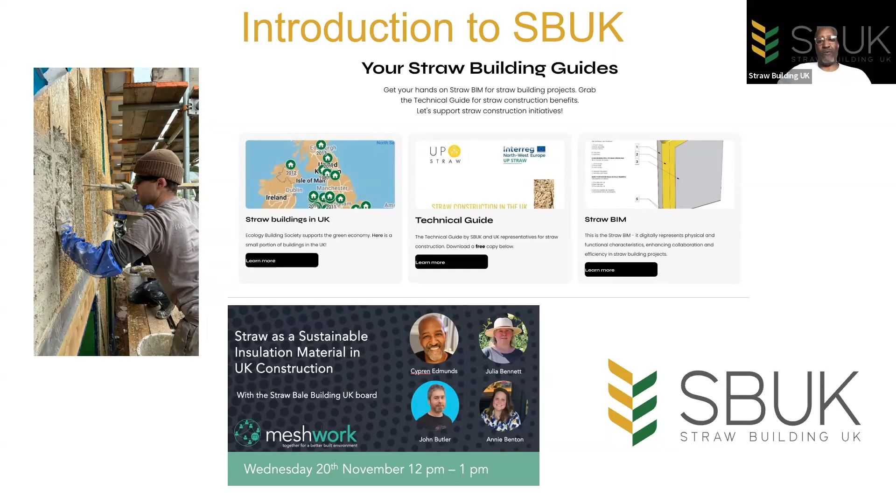Over the past decade we have been working on several aspects and tools that have enabled us to really lead the way when it comes to building with straw. If you go to our website, you can see some of these, available free for you to download, one of which is the Straw EPD - that was one of our previous talks. Also the technical guide and also the Straw BIM.

So, who is Annie Benton? Annie Benton is a Straw Building UK board member. Specifically, she is our treasurer, and she is also a certified passive house designer and technical specification officer for Ecological Building Systems, an organisation based in the UK. They offer natural products in the built environment, from airtight and windtight systems, ventilation and extraction, insulation, and as well as that, they also often offer training courses too.

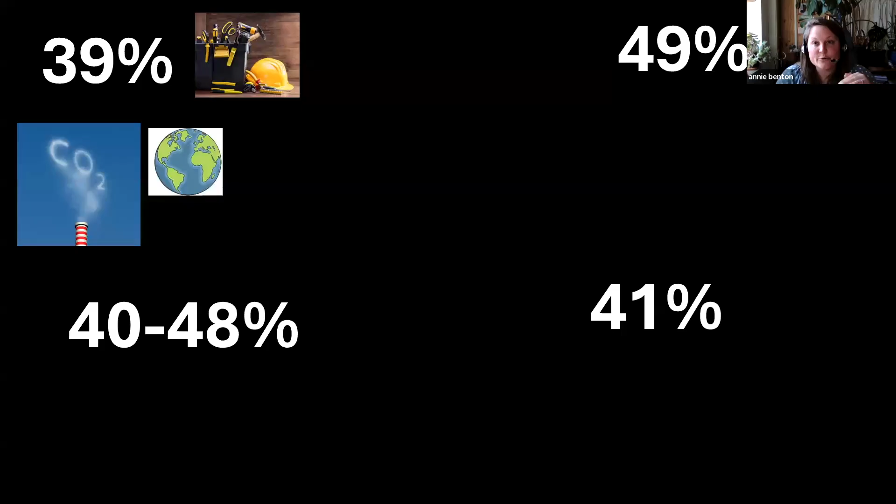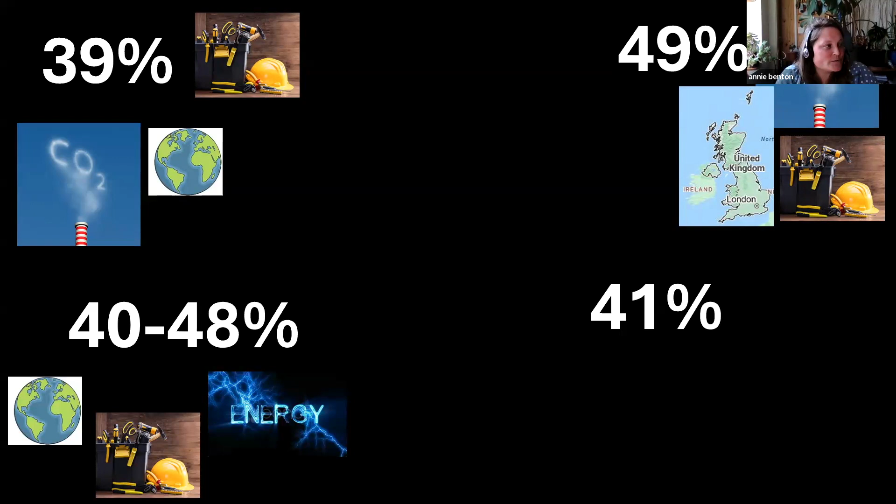That's operational and in construction and in build. In the UK, the construction industry is responsible for about 49% of the UK carbon emissions, which is enormous. On top of carbon, the global construction industry is also responsible for between 40 and 48% of the global energy consumption as well, which is just a profoundly huge figure. And 41% of total end-use energy consumption in the UK was used to heat water and space heating in residential domestic buildings, which is enormous.

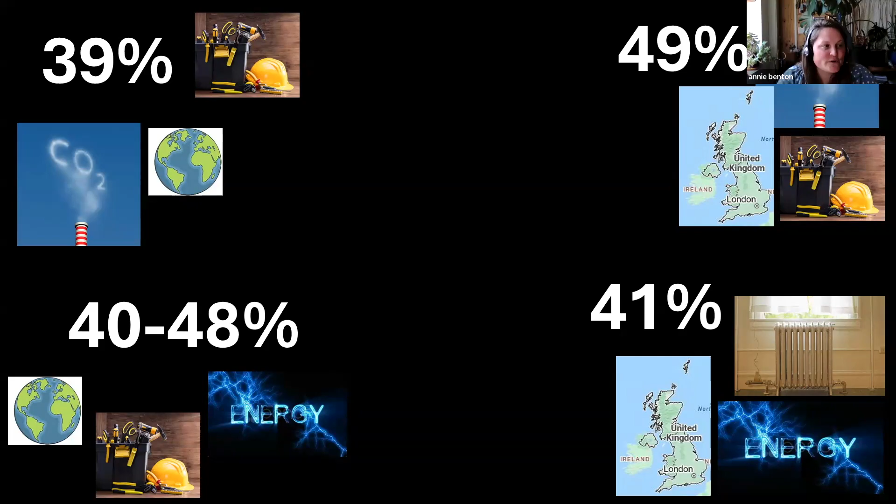They've taken transport out of the initial energy calculation, but still, with the focus here on the need for space heating, which ties into more of my dissertation. Additional data that I dug around and found was that residential buildings in the UK are also responsible for 23% of total end greenhouse gas emissions, with 13% of them associated with space heating, mostly because the buildings that we have are incredibly inefficient. Most of them are graded at a really poor level of EPC, and we have a big job to do.

So you may be familiar with these figures and stats. If anybody wants a copy of my dissertation or they'd like to read it, all the references are in there.

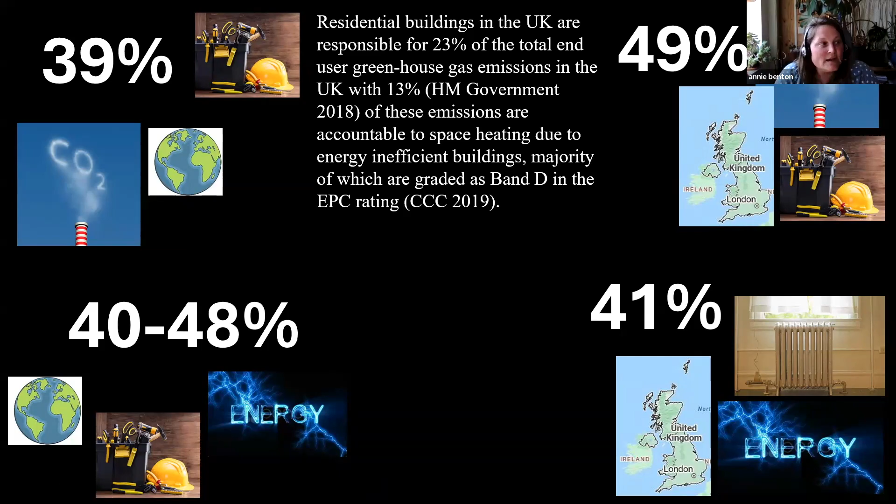So we've got this big issue where the industry is using too much, we're producing too much waste, we're using too many resources. But on top of that, we also have a huge performance gap relevant to design and in-life experience and energy use of a building.

So we are still building buildings that we know will not perform the way that they should, yet we still do it. And for an industry that is very resource heavy and carbon emission heavy, we should be building buildings that we know are going to perform.

So this is sort of where the dissertation came from. The IPCC release reports - the Intergovernmental Panel on Climate Change. They release reports, and the one they released in '23 restated the involvement of human activities causing the global warming of the Earth.

We can see that there's huge impacts everywhere, from extreme weather patterns, global food and water scarcity, disease, mass migration. We're going to see more of these impacts locally to us now in communities, including things like more overheating in buildings and that sort of thing.

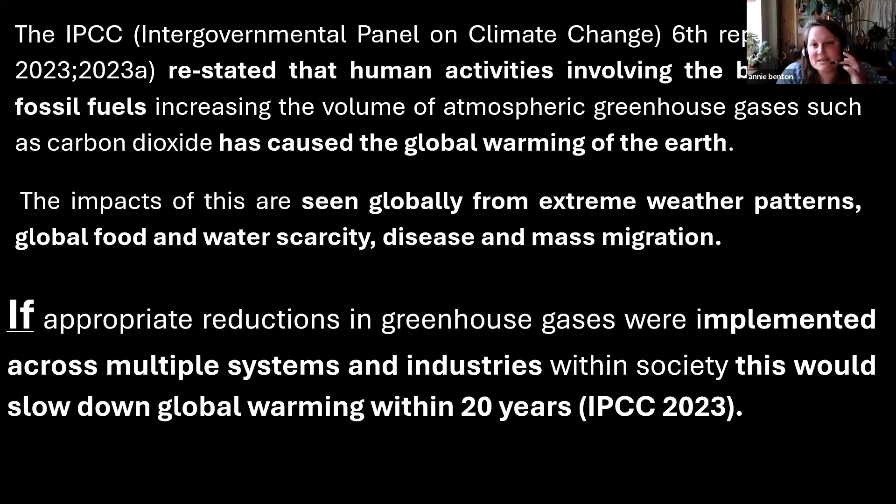So we're all massively impacted by it. But the report also highlighted that if appropriate reductions were made across multiple systems and industries, actually we could slow it down within 20 years.

And construction was mentioned in there as an industry. So what are we doing? Are we acting quick enough? In my opinion, no, we're not. But the fact that there are strategies and things out there that we could be doing, I think is really positive, and I think as an industry we need to wake up and get on with it.

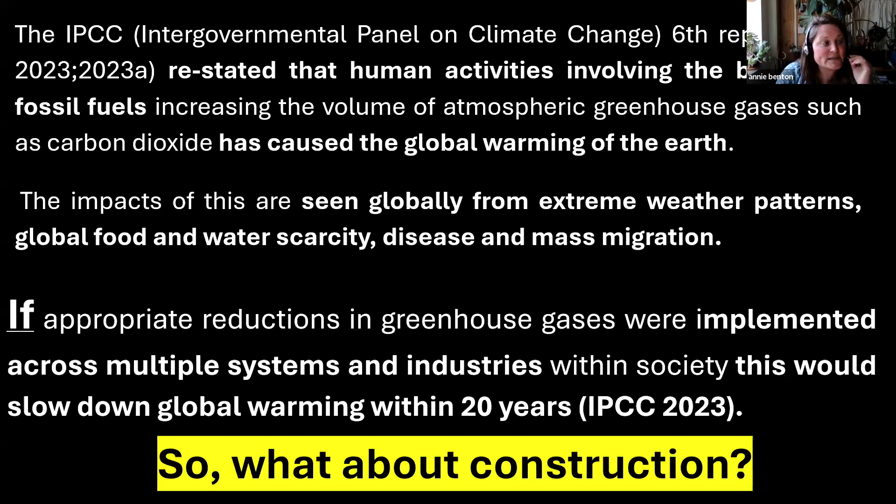We have a lot of the solutions already. So what I'm going to chat to you today is about my dissertation in terms of what I did and the data collected about our EcoCocon family home.

But I'm going to give you a little bit of context first. So this is my actual parents' home as a self-build. I came in later when sadly my dad got diagnosed with cancer and we rallied the troops. So it was their story to tell and their journey to tell, but because he's not here, I'm going to tell it as best I can.

So in the beginning, my parents effectively bought some land here in Suffolk with planning permission for a building that was not a sensible building, not energy efficient, facing the wrong way, not insulated properly, etc. So they re-put the planning in and it got granted for a sustainable home.

And they spent a lot of time trying to work out what materials to use. And my dad was a real energy fanatic, passionate about the climate, passionate about the environment, passionate about the physics principles on how a building performs.

And he worked at the Norwich University and he ran the facilities there and he did the energy management. So he wanted to use a material that had low embodied carbon and low embodied energy from an ethical company.

And he found EcoCocon at Future Build, or Eco Build at the time, in 2016. They then had the opportunity to go out to EcoCocon in Lithuania as a customer of Strawworks, which was an organisation then that was managing design and build of straw projects. And they went out with the license holders of all the countries and had a 3-day training.

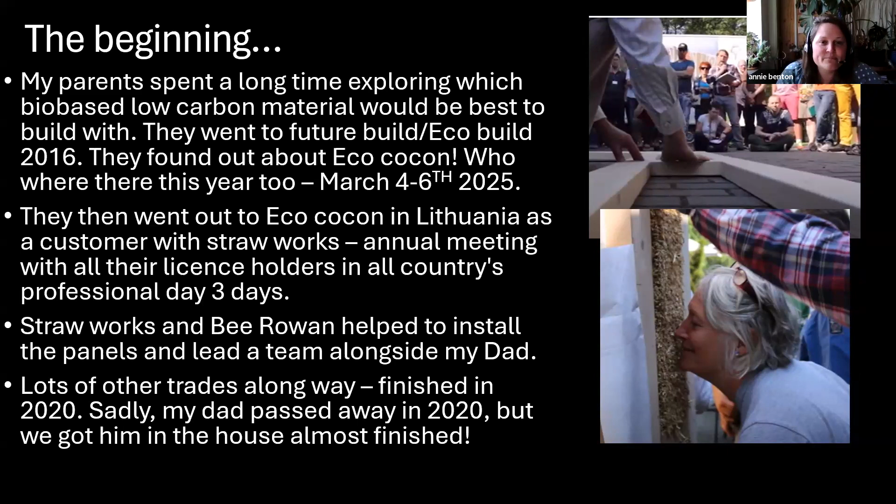Sadly, Dad passed away in 2020, but we did get him in the house almost finished, and he was really impressed by what we'd managed to rally. So that's really nice. That's just him having a beer in the sun because it's sunny today. So why not?

A little bit of background about EcoCocon. We've got George on the call today, so if you have any more technical questions, drop them in the chat and he'll help answer them. It's a compressed straw panel, multi-directional compression straw panel. It's effectively straw in a box, and it has a breather membrane around the outside, and it has wood fibre. You can have internal finishes - clay is primarily the internal finish, and the external can be ventilated facade or rendered.

It's a flat 400 wide panel, Passive House certified, REI 120 fire rated, and I think they've achieved their silver for cradle to cradle, which is amazing.

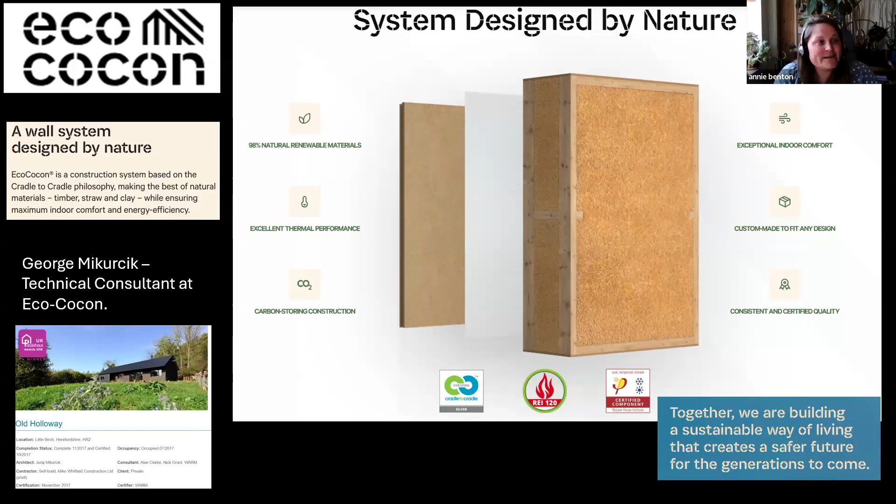A shout out to George's house - he also built an EcoCocon house called Old Holloway. You may well have heard of it. It's on the Passive House Trust website, Passive House certified. Again, a fabulous project demonstrating exactly what we should be building with.

If you go onto EcoCocon's website, there's tons of technical information that's really helpful, and general advice. It's a very good website. I've taken a screenshot from their brochure to show the build up of the wall - you can see the ventilated cladding or render, the clay plaster, etc. Their website is full of information, and it has all the WUFI calculations. Just go and have a look.

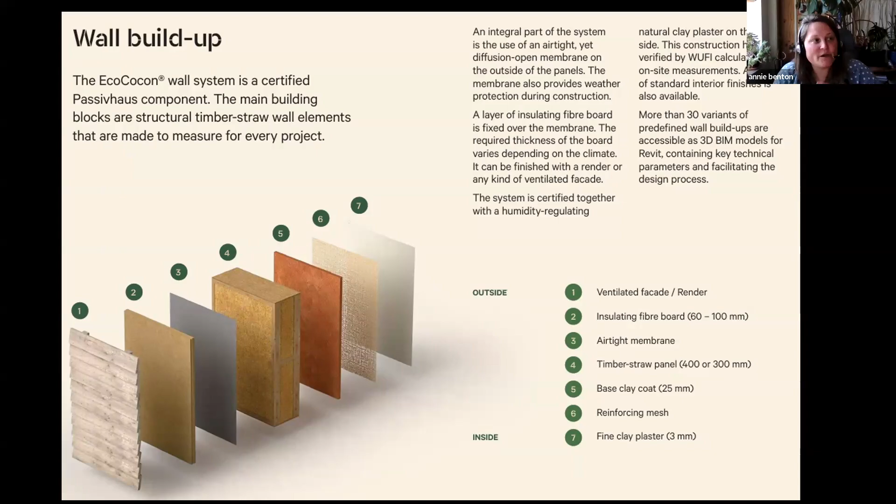I did add in about fire because from working with SBUK, I often get asked by architects and others when they visit our house whether there's a risk of fire. So go and read the fire reports EcoCocon have done - they have an REI of 120. There's a huge report, go have a look. It's not a concern to us - I'm just putting that out there.

When we went to EcoCocon for the design, you create this panel project of what you want, and we designed it in house with them. All the panels are load bearing, and at the point when my parents had the design done, they were also doing the roof elements - I think that's changed now, but originally it was part of it. You can see the panels individually, the lintels around doors and windows, and they have additional timber for structural rigidity.

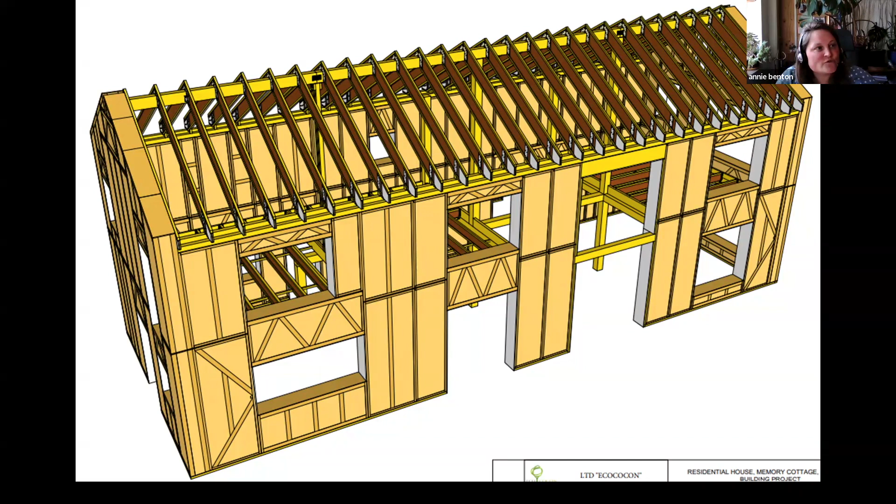We started the build in 2016-17. This is the slab - a highly insulated slab. My parents, my dad particularly, didn't want to use concrete, but when it came down to choices, costs and where you're going to put it, he did put some in the ground. So we have a highly insulated slab with a screed on top.

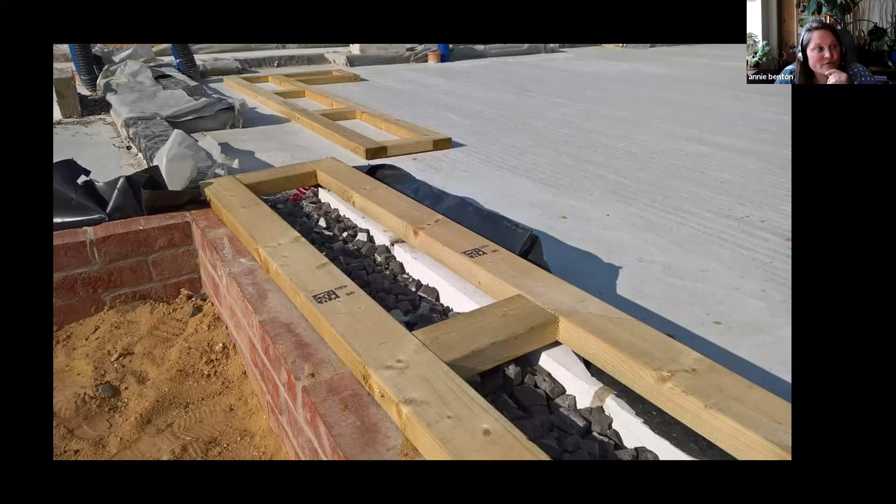The actual walls the panels sit on are an insulated, thermally broken cavity wall - 400 wide, filled with glapor foam glass aggregate in the middle. The internal leaf brick is a thermal block, and the internal face of the external leaf is also thermally broken, so you've really stopped the thermal bridge through the brick plinth, which is problematic on buildings. I've put my thermal imaging camera around the building and we don't have any bridges there, so I think he did do well.

We had an external groundwork company come in and pour the initial screed over the insulation, but my dad put all the stud work, little ladders for the panels, and he was out there the day before the panels arrived making sure everything was completely level, which it was - the groundworks team did a really good job.

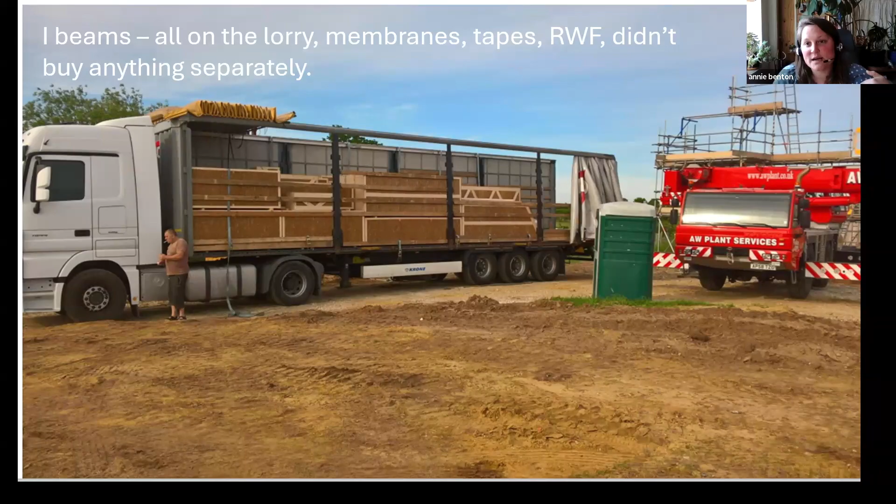All the panels arrived on 2 lorries from Lithuania - we had all the membranes, tapes, the rigid wood fibre, the clay, and the roof I-beams. They all arrived stacked like Tetris, coming off in the right order as to what was needed on site. Very organised. Some pictures of just the beauty of them - they're possibly one of the most beautiful building products I've seen and get to be around.

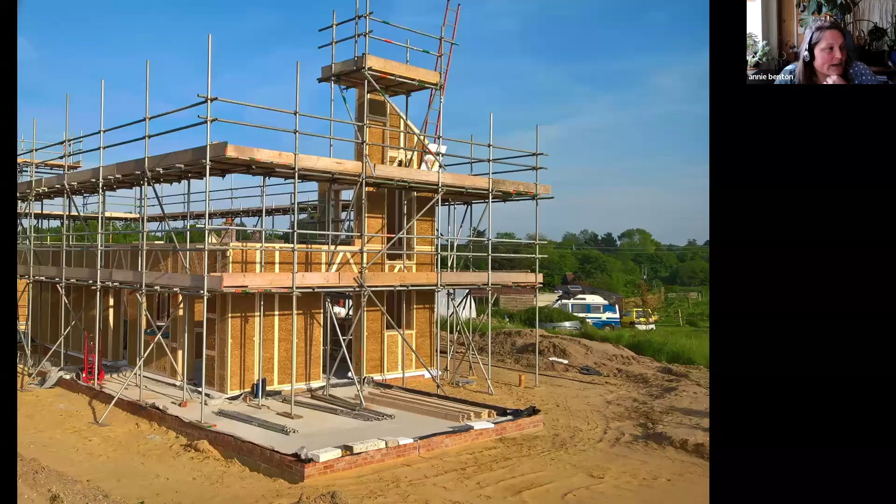This is the west gable end. The whole lot took about 2 days to unload and 2 days to go up with about 5 guys. But I will stress, they did know what they were doing with EcoCocon, so it would take longer if you didn't. The technical guidance and advice for construction is exemplary, and it isn't rocket science - it's following the instructions, following the order, and making sure you fix things properly.

So just more of the panels, just because it's a shame that they're covered up now. We had a couple of things in this picture. You can see the black plastic that doesn't stay there - that was purely put up for construction protection, just in case of rain. This was put up in the summer, but we do have rain in August occasionally, less so now as it's becoming much hotter. So as it was going up, they were just getting those battens and the black plastic on to ensure it was safe.

The actual timber in the middle that you can see, the oak frame, isn't necessary at all - the panels are load bearing. My dad wanted to put it in as a feature, so fair play to the man. That's what he wanted to do, and the roof calculation was then done with that in mind. But as I said, it's not necessary.

So now you can see there's something on the roof covering - it's just an external wood fibre board that goes over the top of the rafters. The I-joists in the roof were filled with Warmcel cellulose insulation, and there's a membrane, then a wood fibre board and a clay internal finish. As you can see, we've got some windows in - maybe, oh no, it's just the membrane over the windows, no windows yet.

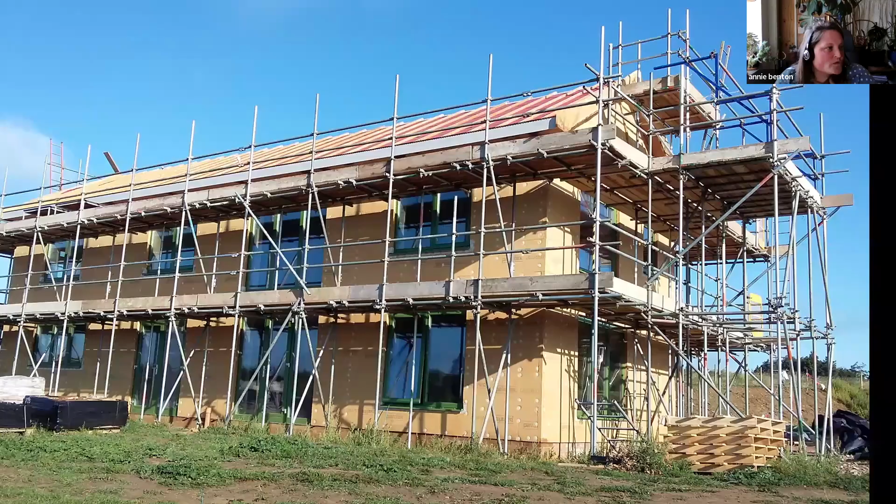So you can see then the 60mm rigid wood fibre board's gone on. They've had the waterproof taping around the windows, and all those thermally broken fixings as well - just assuming that there's no... trying to stop the thermal bridging, which is good.

So, services - I am in no way a services engineer, so I'm just going to take you through briefly what's happening in the building. It was designed with PHPP as a passive house. We didn't get it certified, which just wasn't the motivation of my dad. I'm kind of torn with that - I wish he had, because I think the more buildings we have built with sensible materials that prove they work, the more powerful they are. Sadly, I think in our industry, biobased materials have to fight 50% harder than mainstream materials, even though mainstream buildings don't perform. So I'm on a double-edged sword - I understand the reasoning, but I kind of wish that another one would just be brilliant.

So it has MVHR, which is great. We have a Zehnder ComfoAir Q unit, which is brilliant. I change the filters up there every 6 months or so - you can really see the dirt and grime that comes out of those filters. We do live in a rural area, there are farms around us, so there would be a lot of particulates. But you can really see it.

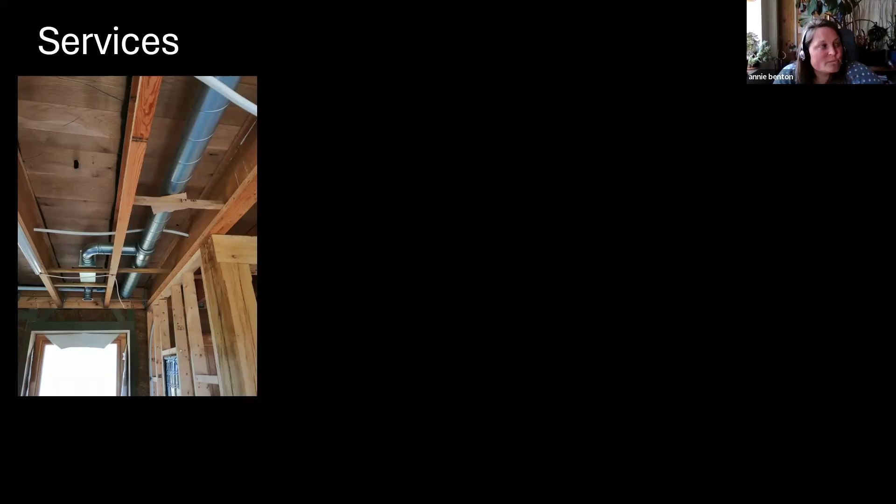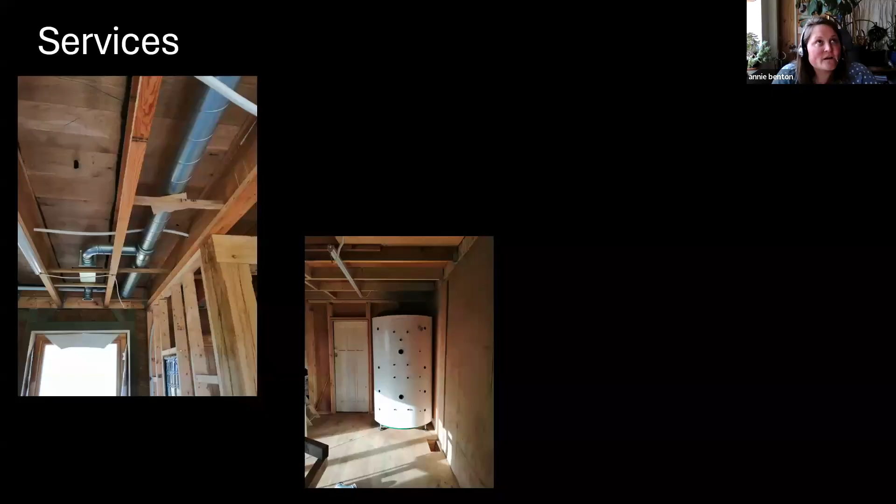We have a thermal heat store we call the Dalek, that's slightly oversized, but it was one of the ones available and my dad needed to get it into the building. So we have hot water generated from the sun - we have solar thermal, and hot water generated from a gasification back-boiling stove, which I'll show you in a minute. So there are a couple of times in the year where it would be really good to have a wind turbine to generate hot water. We end up putting the fire on even when we don't need the heat in the building, but it's a very efficient stove, so it lets out minimal heat. It's very clever in what it does.

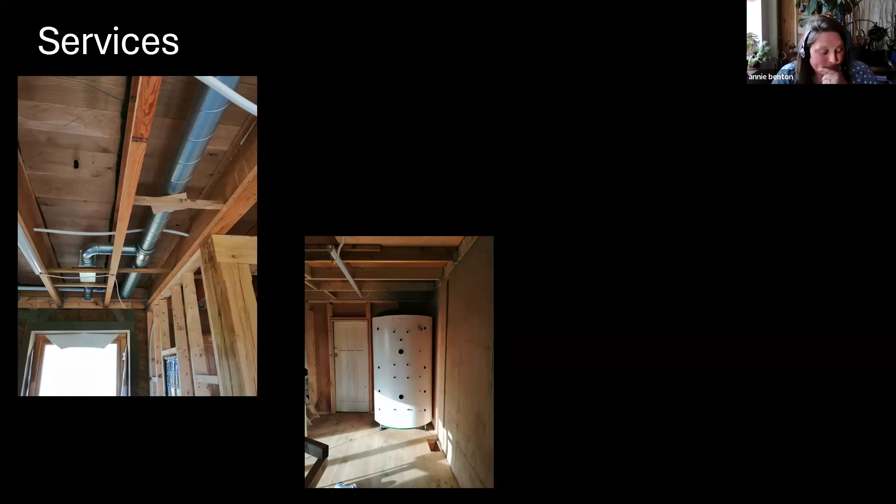We do have an underfloor heating system, purely because it was put in as it can't be retrofitted later. My parents figured that if it did get to -30, then we'd need some heating, so we better put something in. We occasionally use it, very occasionally.

We're glad it's there, it's a good thing. And this is our amazing piece of kit - this is a Walltherm, and it is just the most amazing piece of kit.

So it's a fire with a back boiler on the back. It moves the water - cold water comes in, it heats the water, and the water goes up and gets stored in the heat store. But what's so clever is it burns so efficiently. It takes about 8 to 10 logs to heat the 1,000 litres up in the heat store.

So when you put the logs in and it gets to a certain temperature, you flick up a lever, and all the gases that were waste, that were going up the flue, get pushed down and reburnt, so we're using the energy from those waste gases. So what comes out is really minimal waste and really minimal particulates.

So it's absolutely brilliant. It doesn't let out a huge amount of wattage into the room, which is a good thing, because the house is so airtight and insulated anyway that you would probably overheat. But some of our pipes maybe aren't as insulated as they should be, because it was a self-build, and now knowing what I know, maybe I'd go back and redo those.

So there is a little bit of dissipated heat from the domestic hot water pipes, which we do see in passive houses when it comes to overheating and stuff like that. But it's a fabulous system, and it's just brilliant, very efficient.

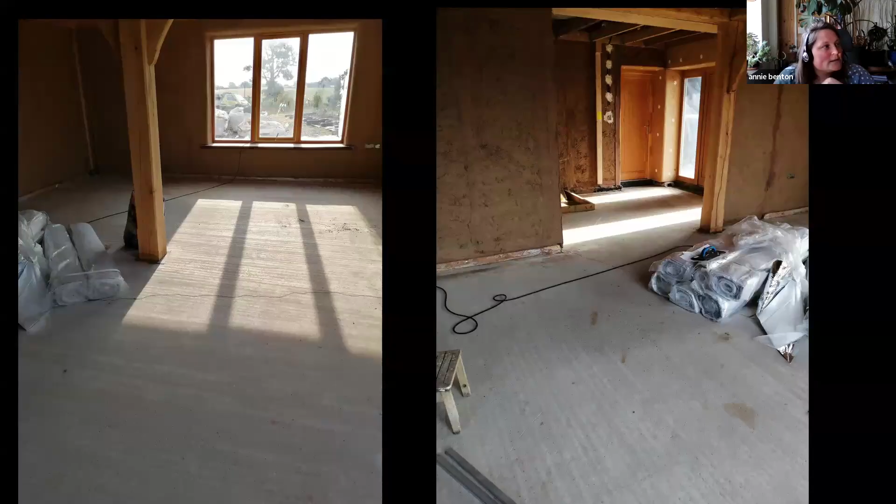So this is just to show you the screed that went down and the clay plaster. You can see the base coat internal clay plaster has gone down, and also there's electric conduits that have been cut through and then plastered behind - you can just see over in the back there with the white splodges.

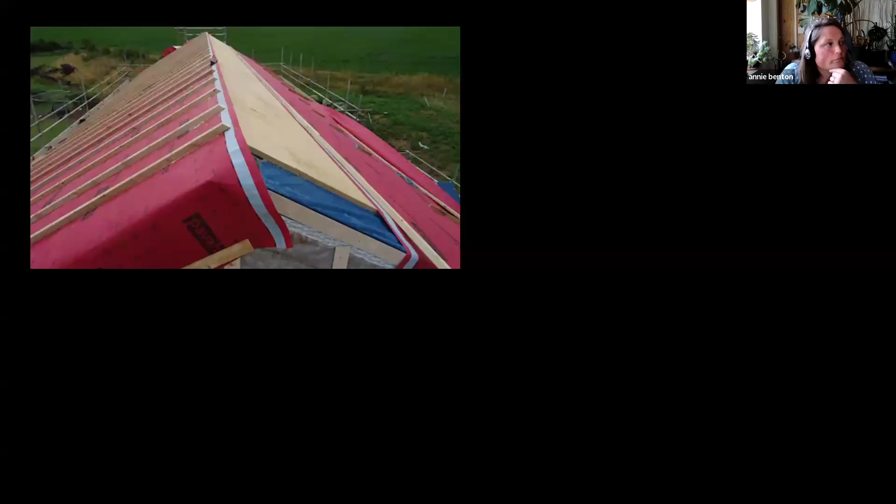Wood fibre board over the roof, sarking board and cedar shingles with batten and counter batten. These have now changed, aged in colour, which looks really pretty. And the external building is also lime rendered.

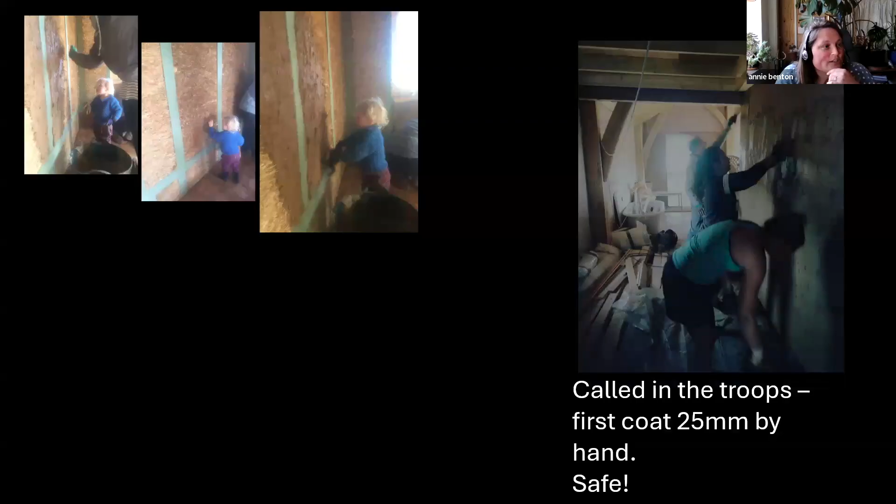So clay plaster, just to give you an idea of the air tightness - it's an absolute joy to use. If you've ever had the opportunity to use it, then excellent. If you haven't, then try and get some. It's just the most amazing material.

It's just so safe, so you can see my niece actually putting on the base coat with her hands - she must have been about 2. We just smush it into the straw, and then for the top coat you'd use more of your trowels and standard plastering tools.

But we rallied in the troops to get this done, because this is when the diagnosis stage happened with my dad, and it was a call-in-the-troops moment. But it was an absolute joy - this is where my interest in clay plastering started from as well, which is nice.

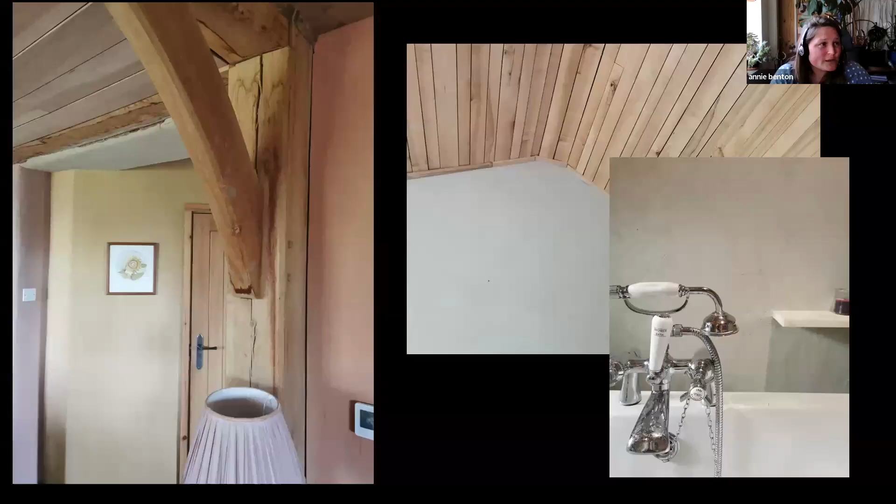So internal colours, just to show you - all the clay came with EcoCocon on the lorries. The branding, I think it's Yuku, the clay plaster. I think there are other ones they've added in terms of colours and textures, but you'll have to check with George about that, because I'm not sure. But I just wanted to show you the colours.

So there's blues, greys, yellows, greens, oranges, reds, pinks, greys, whites, and they're all natural. And you can dilute them with the white to make different shades of colour. It's just fabulous.

And when the sun shines through the building and onto the back of the wall, all the mica in the clay just sparkles. It's just so beautiful. There are other things you can put in there as well, like dried flowers and stuff if you like, but we didn't.

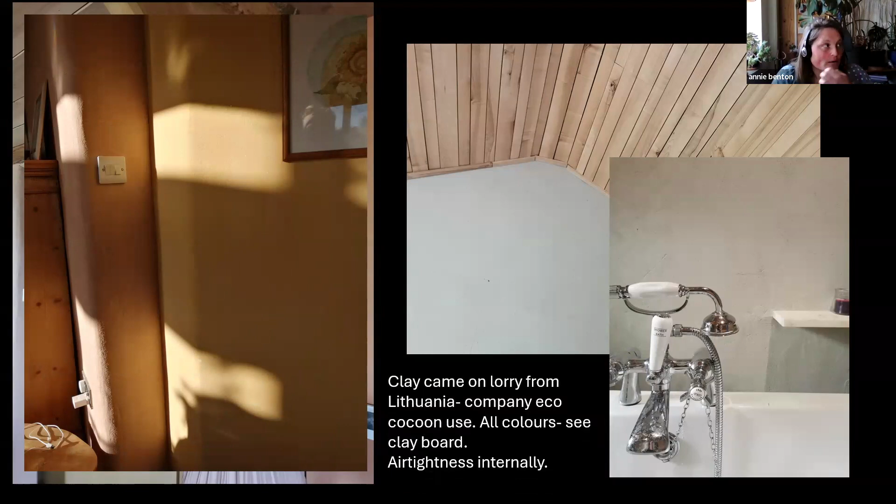But again, it came on the lorry, and it's about 30 mil thick for air tightness. So we achieved 0.7 air changes.

So this is what it looks like. We've got quite a lot of glazing on the south face, and the west end where the conservatory is. The conservatory actually acts as a bit of a buffer zone, which will definitely help the building not become too hot, because we have no shading around us.

We don't overheat. We do have summer bypass in our MVHR, and we do open the windows at night to allow dual aspect night cooling. But also, the amount of mass in the building and the fact that it's airtight means we just close the windows and shut it down.

A couple of years ago it was really hot here, I think we had like 36, 37 degrees. It was about 25 in there, and we had 5 people, 2 dogs and babies for a week and a half, and it just didn't get above that. So thermal mass has a huge part to play.

The floor is concrete, there's pamments on the floor. The clay adds mass, the straw has mass to a certain degree, the wood fibre has mass. So I think that really helps its performance, but it's a very thermally comfortable building.

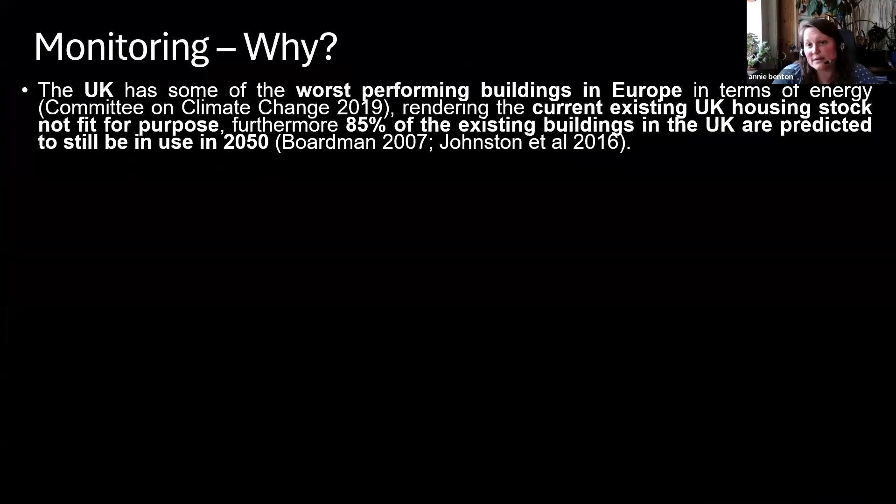So, monitoring - why? You may or may not know that we have some of the worst performing buildings in Europe, and there was a report done that effectively rendered the current existing housing stock not fit for purpose, which means we've got a lot of work on our hands to do with retrofit. But what's more concerning is we're still building buildings that are not performing. So that's maybe more of a moral issue.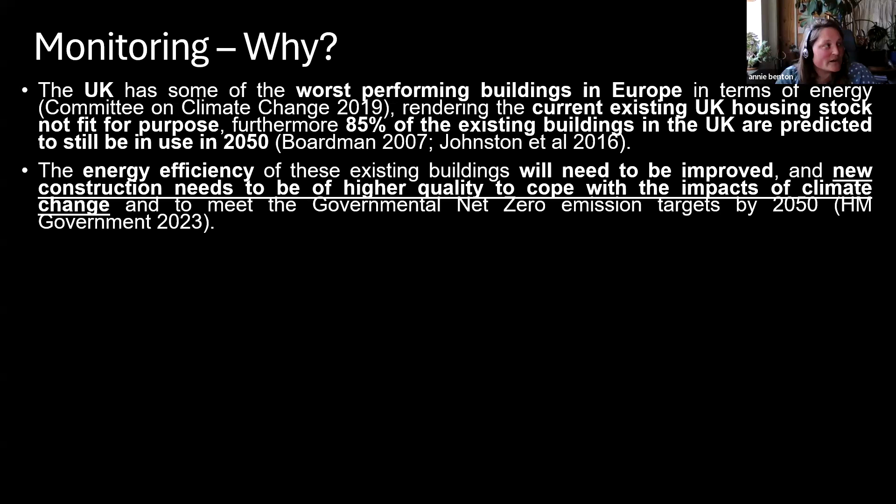We know that the energy efficiency of these buildings will need to be improved to meet the impacts of climate change, to meet targets by 2050. So what we need to do more of is actually more monitoring and evaluating the buildings that are working, and why the buildings that are not working, and then what we can do that is the most cost effective, sensible practice, and what materials we should use, etc.

So using science, modelling and measuring in situ is vital to understand how buildings are performing. But this is not mandatory in the UK. They brought out a British standard in '22 that's aiming to put more evaluation in as mandatory, but it's not. And a lot of the time, as I said at the beginning, there is this performance gap.

There's like a 60% performance gap where buildings are meant to perform to level A and they perform to level D - like 60% worse than they should. So yeah, we need to do more of this measuring. It needs to be made mandatory.

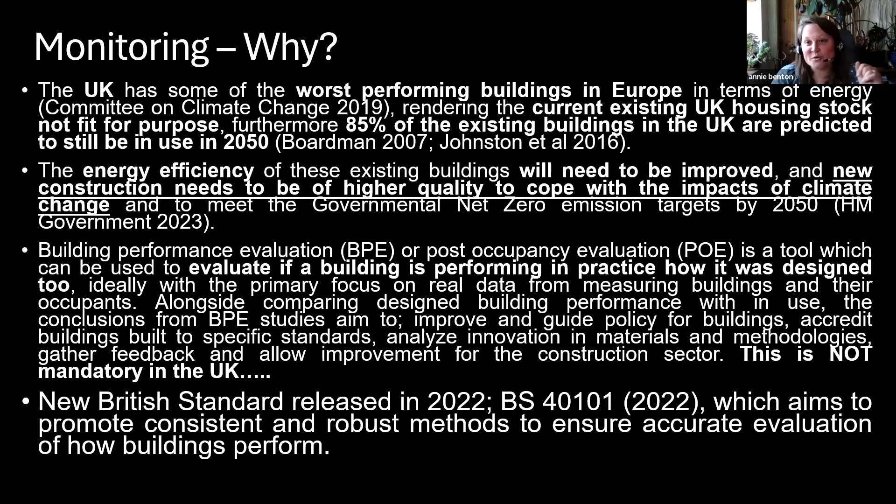So this is what my dissertation focused on, primarily also because I could find very little studies of in situ straw and straw panel houses, and I knew that it worked because we live in it. So it was a case of trying to prove that it worked, which is sort of the motivation behind it.

So when it comes to doing building performance evaluation, there's different metrics you can use. This is a great paper - I think I've put the reference on a couple of slides - to give you an introduction to building performance evaluation if it's something you're interested in.

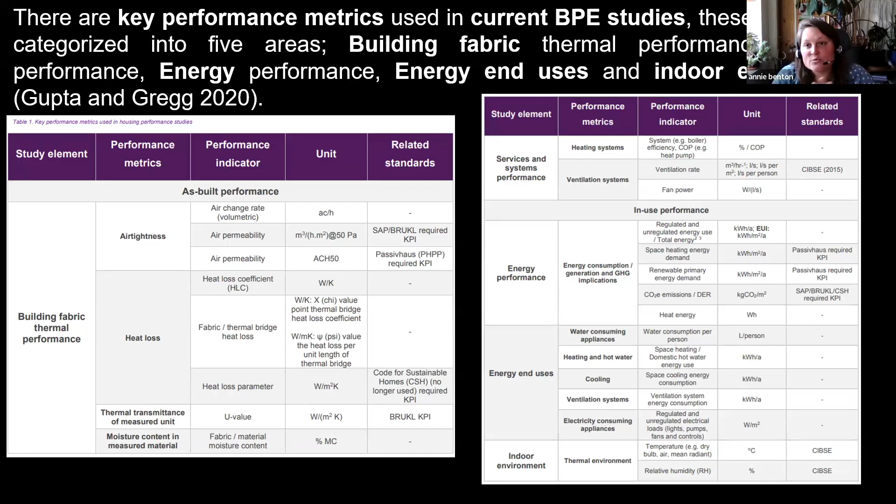So there's building fabric thermal performance - things like air tightness, heat loss, the thermal transmittance which is the U value - and then measuring moisture. There's also services and systems, energy performance, energy end use, and then indoor environments. There's all different categories you can investigate when it comes to doing building performance evaluation.

I chose these two, the U value and the indoor environment, primarily because I managed to get hold of some equipment for free, which was great. So I contacted the Cambridge Architectural Research - I'm based in Suffolk - and I went to meet Jason Palmer, who's done some work for BEIS doing lots of U value measuring. I said to him, I want to measure a straw house, will you help me? And so he gave me the kit to use, which was just the most amazing thing.

He showed me briefly how to use it, and helped slightly with the error analysis and that sort of thing to help make sure I knew what I was doing, because I'm a complete novice in this - I've never done any BPE before. I also need to shout out my supervisor, John Butler, who was epic, as we all know if you know him. He was so helpful in understanding the British standards.

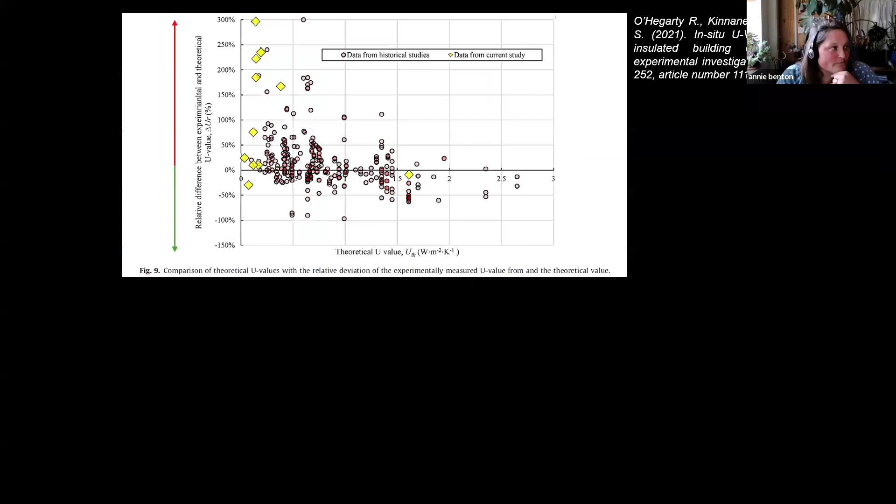So these guys lent me the kit, so I was like, right, well, I'll measure U values. And one of my reasons to do this was because lots of papers show how over-insulated buildings actually underperform.

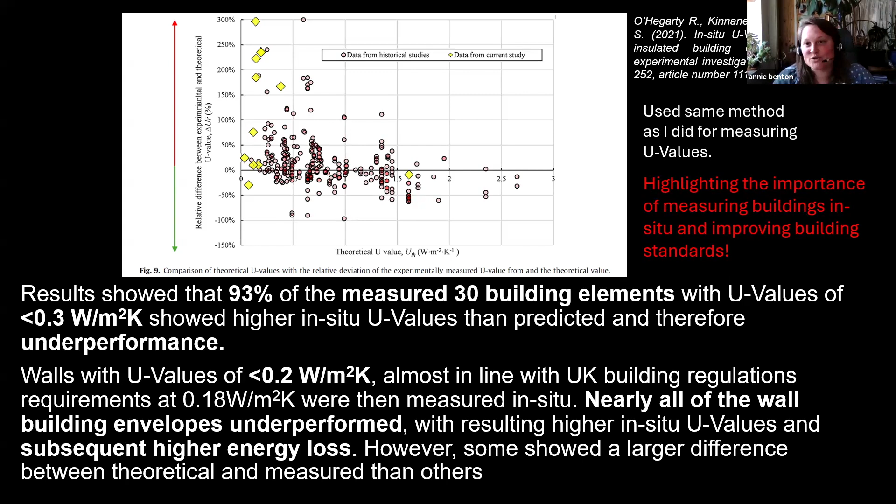This paper is a bit controversial because no science is perfect, and statistical analysis can vary. But this paper used the same method as me, measuring lots of highly insulated buildings, and found that 93% or more underperformed compared to what they were meant to with their U value. So the U value was higher than it should be, which brings up further questions we'll get to later. I put this in because it highlights the importance of measuring actual in-situ performance, improving understanding of how these buildings actually work, to try and improve building standards and policy.

These are some of the literature you might want to look at if you're interested in this. Gupta and Gregg is a really good review, and Fionn Stevenson's book is also excellent. And then, as I said, there's the new standard.

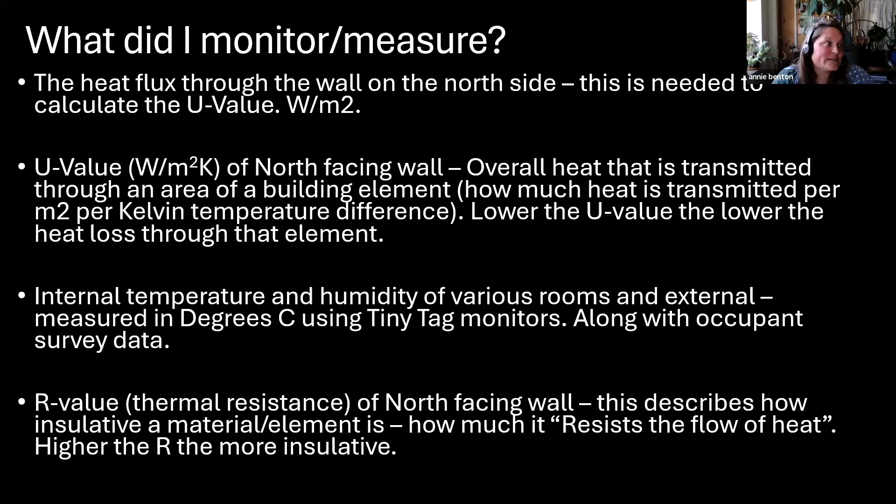So what did I monitor and measure? I measured the heat flux through the wall on the north side using the kit I'd borrowed. That allowed me to calculate the U value of the wall, the overall heat transmitted through an area of the building per temperature difference in Kelvin on each side. I also measured internal temperatures and humidities of various rooms and outside. And because I'd collected the heat flux and temperature data, I could also work out the R value of the straw panels.

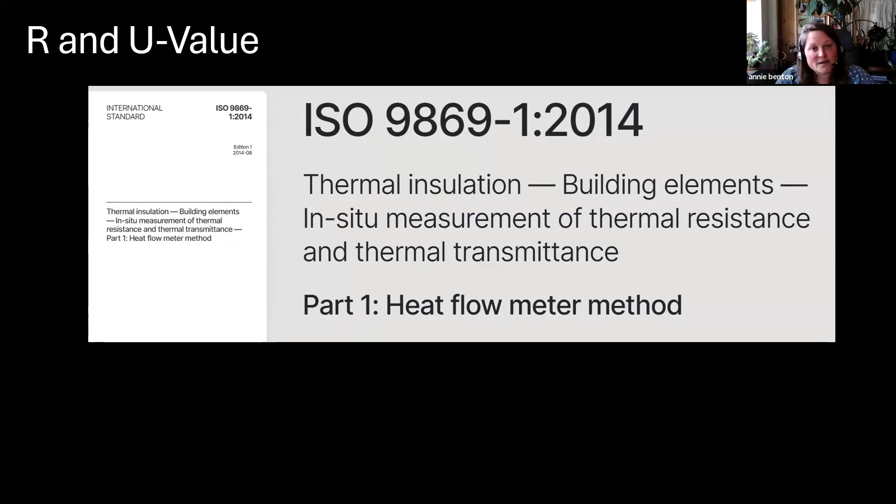This is the British standard I used, ISO 9869, the heat flow meter method. A couple of reasons why I used this: I could get hold of the equipment, but the motivation was because it's the most widely internationally recognized non-invasive method. It is far from perfect, and there are a few other methods you can use.

Now we have things like the pulse test, and other things that Build Test Solutions also do. But in terms of British standards, this is the go-to one. So I thought, if I'm going to do this accurately and get the data correct, I want it to be comparable to as many things as possible. So let's try and do the most popular method, which is also why I used it.

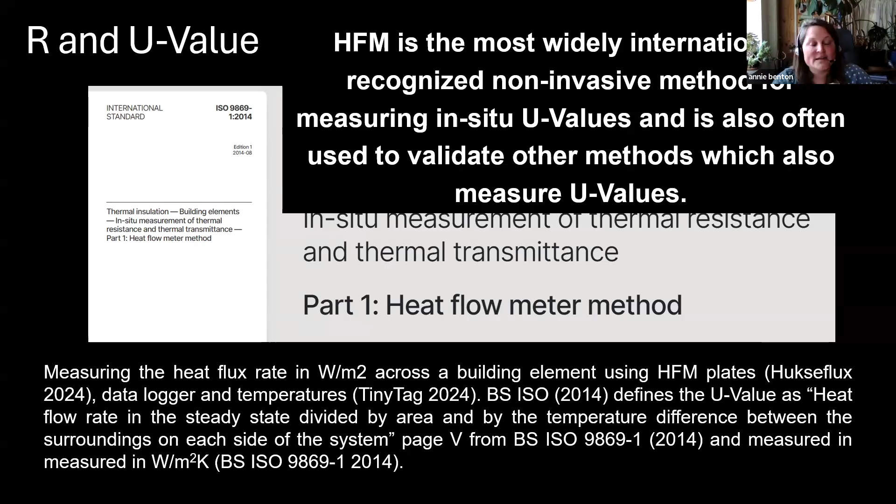It basically measures the heat flux across a building element using heat flux plates—Hukseflux, if you've heard of them—plus data loggers and surface temperatures. I'll show you a picture in a minute.

I installed equipment on the internal face of the north wall to avoid any solar gain, and the data logger collected that heat flux data for 25 days over January 2024. This was to reduce the risk of small temperature difference. The British Standard recommends a minimum temperature difference of 10 degrees from inside to out, and highly insulated buildings should be a bit higher than that. Typically you'd do this over 7 days.

To make the data more accurate, I did it over 3 weeks, thinking that over a longer period the averages would be more accurate because I've got more data collected. That was one way to try and reduce error. I did actually get the temperature difference needed anyway, which made the results much more robust.

I stuck those red pads on the walls with tape. They've got a plastic square around them, and you fix the plastic to the wall. This is what they did in the Baker paper that Jason Palmer from Cambridge had used. It's far from ideal, and one thing worth looking at is how to measure walls using clay plaster.

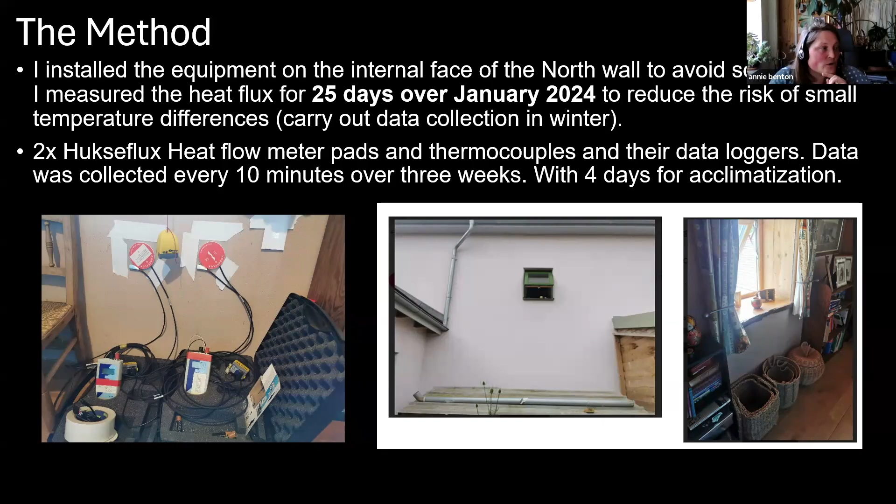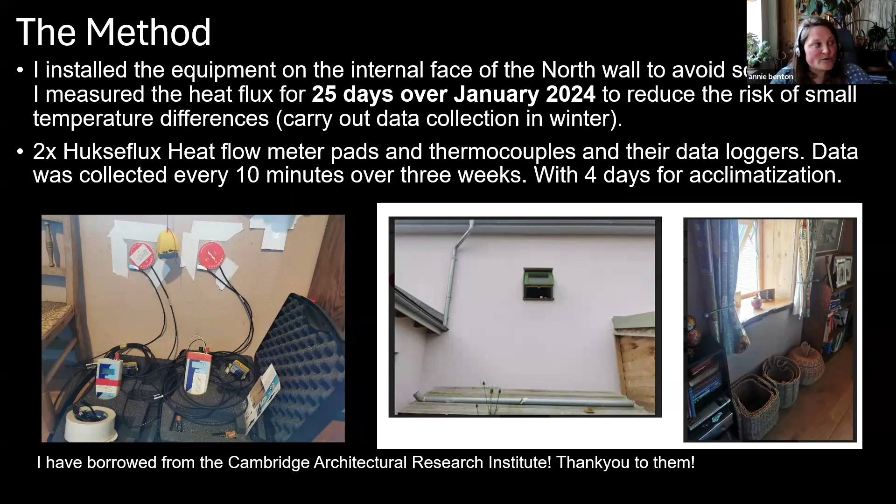I collected data every 10 minutes over a 3-week period, with 4 days for acclimatization. I also stuck an air temperature and humidity measuring device on the outside of the building. I did not do a surface temperature on the outside because that would require digging into the render, and I didn't want to make a hole in it. So I did air temperature outside and internal temperature inside with thermocouples on the surface of the wall.

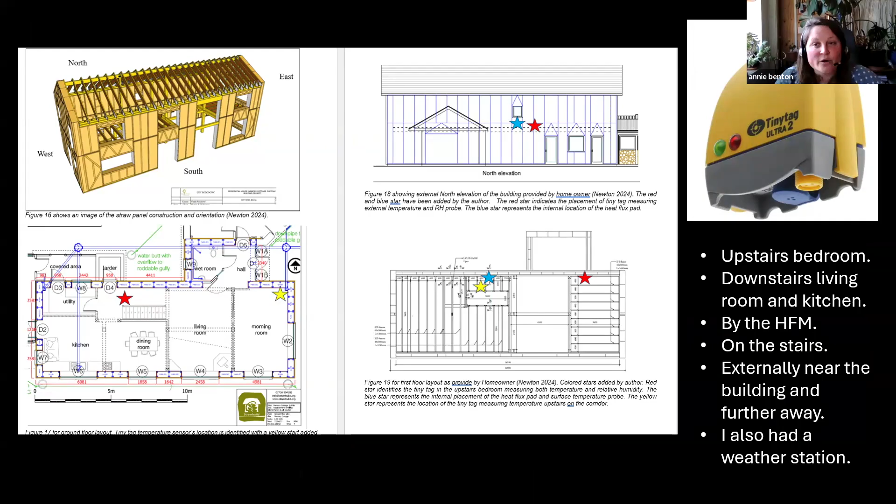So I put tiny tags all over the place, upstairs and downstairs, to monitor temperature and humidity, and also the weather station outside. I was also very fortunate enough to be able to borrow about 10 of these from Cambridge.

So the maths - this is how the R value and U value were calculated, just using maths in the standard. It's actually quite simple. It's to do with looking at your heat flux and then dividing it by your temperature difference, and then the R value is the other way. So it's actually not too difficult.

It was just about getting the right average, making sure the data I'd collected was accurately reported and stored in my Excel sheets. And then the most challenging thing was actually trying to work out the error calculation.

Because the British Standard is just abysmal to read. I remember having a meeting with John, and we sat there for an hour scratching our heads on how on earth we could understand what it was saying, which makes me think that all these methods have inaccuracies, but probably because the British Standard is so hard to understand that obviously there's going to be inaccuracies. I think someone needs to translate them into a way that makes it accessible for people to understand.

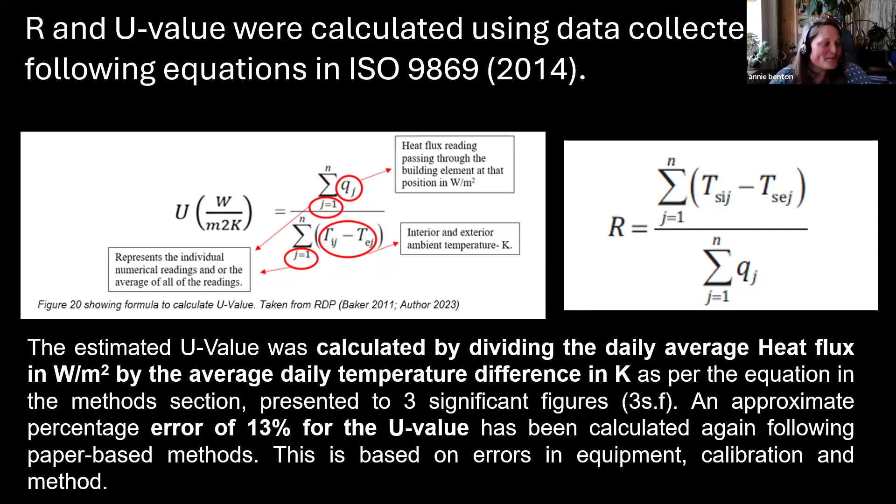So we eventually managed to work it out by using other papers, which was probably one of my proudest achievements in terms of this whole dissertation - to work that error out at 13%, which just, yeah, was a mountain, shall we say, but we got there in the end.

So results: the designed value of this build up from Ecococon is 0.13 as a U value, so watts per meter squared Kelvin. And then what I measured was 0.148, so you could round it to 0.15. So we were pretty chuffed with this, to be completely honest, for a measured in situ U value.

But then what was even more exciting was when I put my error value on, it actually could have been within the range of 0.13, which means that the building, to a point, could be performing exactly how it would be in a laboratory. Now, obviously with errors - human error, installation of equipment, all that sort of thing, not being a BP expert - you're obviously going to have an error range there.

But as a family, I think my dad would just be so chuffed. We know it's performing because we live in it, but to have that data is just really cool.

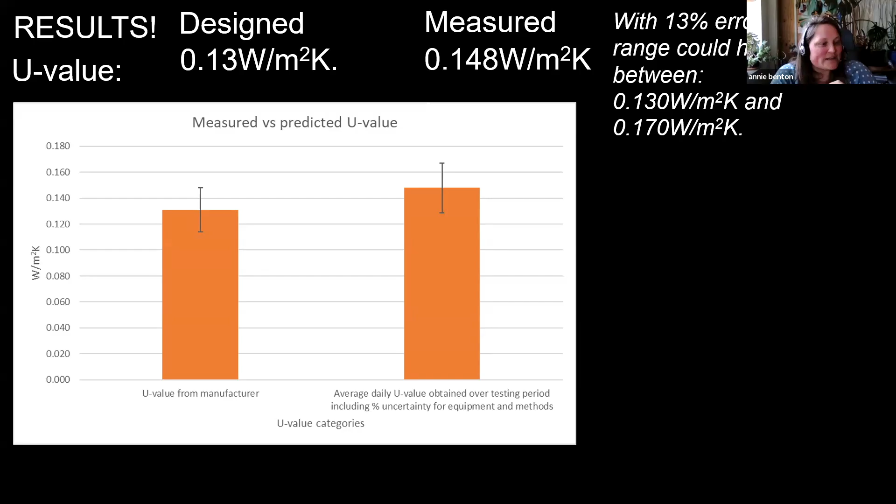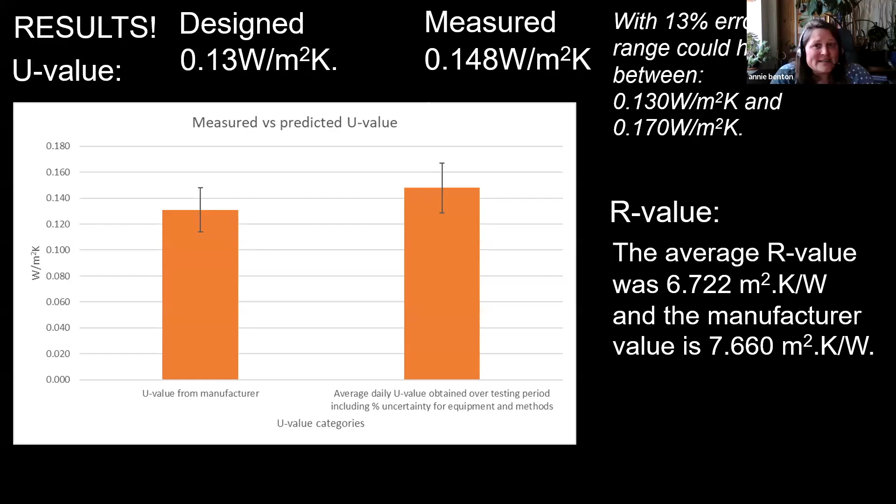So the R value as well was really close to manufacturer. The higher it is, the more insulating. So an R value is a thermal resistance value - if it resists more heat, then it's more insulating. So again, similar, in line with Ecococon as well, which is great because it's a lived-in building. So we were really happy with this.

So the heat flux - these are things that sort of are errors or limitations within that method. That little red heat flux plate is actually only measuring a tiny area of the building. It can't predict the overall performance of every aspect of the building fabric. It's representative, and that's how it's accepted in the science world. It's a representative sample. Now, you could have done loads of them, which would have been another way of doing it, which I didn't do.

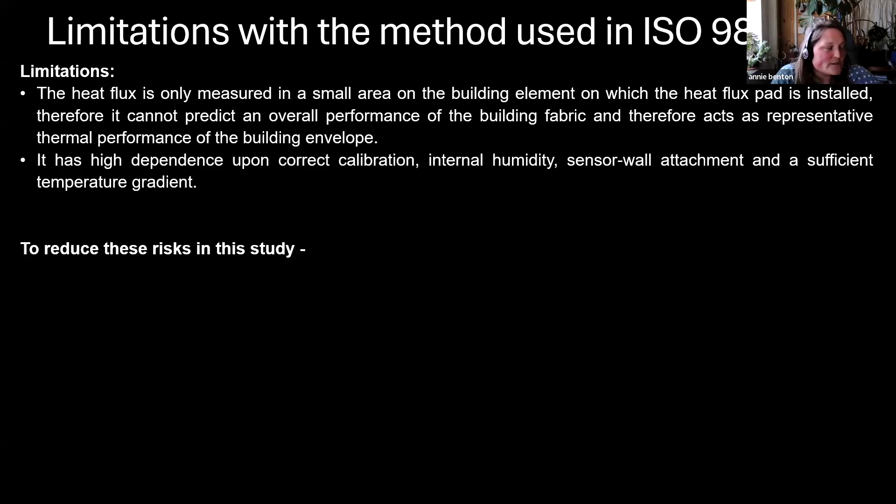It does also have high dependence on correct calibration, humidity, and then sensor to wall attachment, as I mentioned earlier, to the clay, and the sufficient temperature gradient, which we did actually meet. Surface temperatures are also more accurate than air. And outside, I didn't want to make a hole in the render, so it is air outside, but I calculated that into my error calculation. So all of these things have been factored in for.

So I tried to reduce the risks that I've just mentioned by extending the days, as I've said before. A larger data set averages out fluctuations and reduces the risk of invalid results. I did also calibrate the equipment as per the Cambridge instructions, and the error calculation included that I hadn't calibrated it anyway.

So I went over the top in terms of ensuring over error analysis rather than under error analysis, partly because that just felt better for me. And also during the measuring time, I did actually manage to have the temperature difference that was required in the standard, which was so exciting - which you would expect to have actually because it was winter and our house is very insulated and warm.

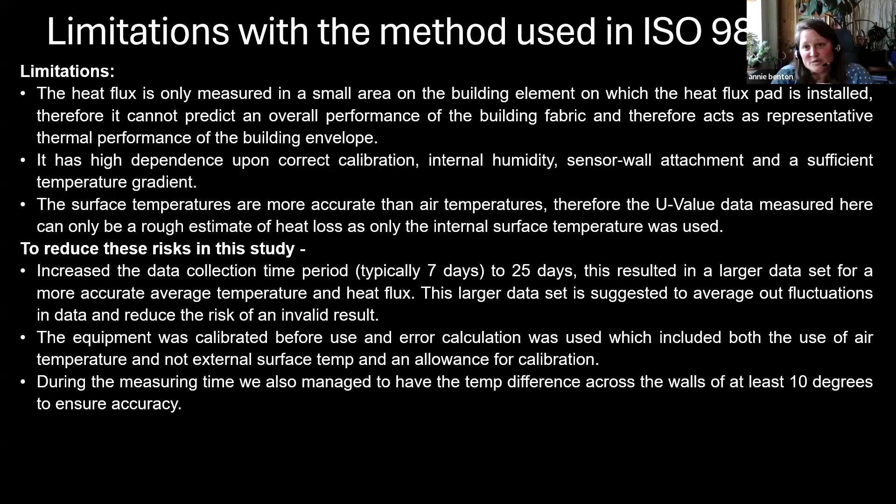But it's reassuring. So that in situ U value I measured from the study creates the assumption that somewhere between those two values is the heat that was lost through my wall in January 24. So it's within the manufacturer's range, but also a range we're really happy with, which I think shows that it's working.

Things that have impacted my U value, as I've said, in terms of the adhesion to the clay, which is the second point of the heat flux pad, the rougher surfaces, we need more studies to work out what's the best thing to stick that with. And also just if they're not placed correctly - I think they were placed correctly, but it would be worth reviewing. And then also just having more heat flux pads.

So I did actually have a couple of kits, but they only used 2 in that place. And then the other one I used for some reason didn't do anything it was supposed to do, and has now gone back to Cambridge. So I think that would really help if I'd done multiple as well.

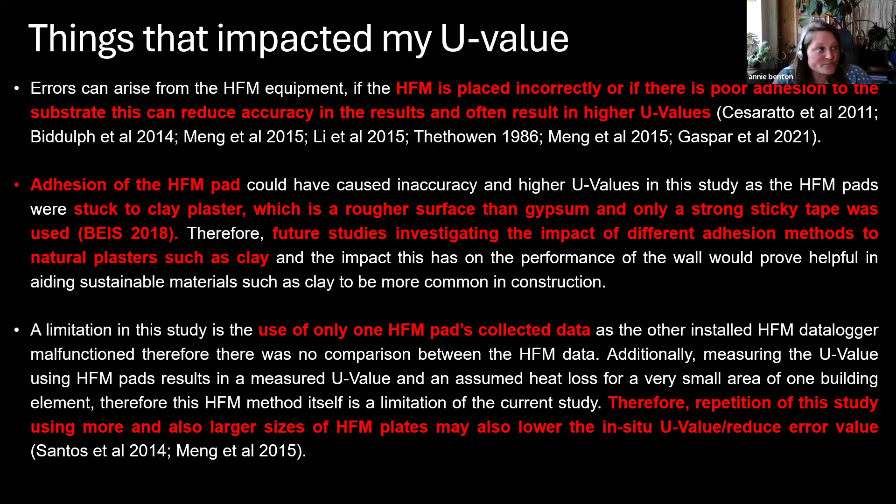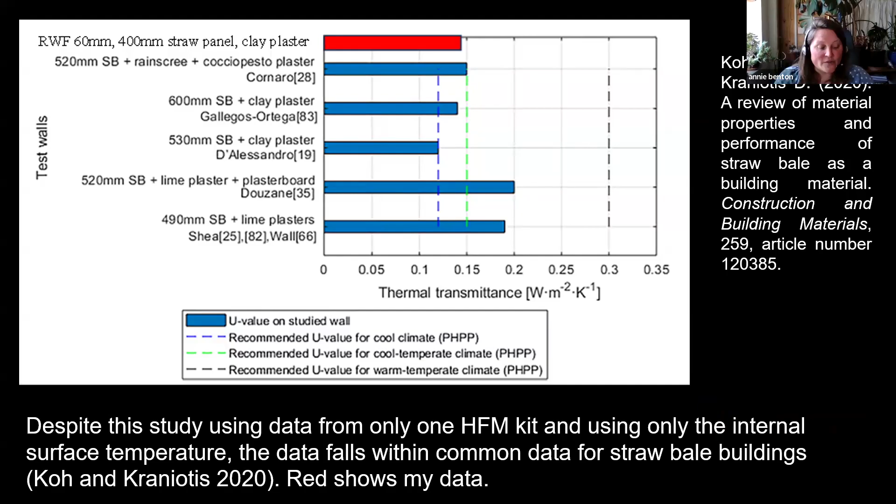So this is a paper about straw performance, straw bale, and you can see the red line is the data from my study using only 1 heat flux meter kit, and it sort of fits in with this typical build-up of straw, even though it does have the wood fibre on the outside, which is reassuring to me that it fits in with other trends measured in situ. These are bale buildings though, must stress they're not panels.

So I also measured internal and external temperatures. The average external temperature was 3.6 degrees, internal range from 20 to 21. Remembering here that the building is very airtight and has MVHR, so we would expect the temperatures to be stable and consistent, which is great that they were. That's exactly what they were. Obviously if you open doors and windows it's going to change a bit.

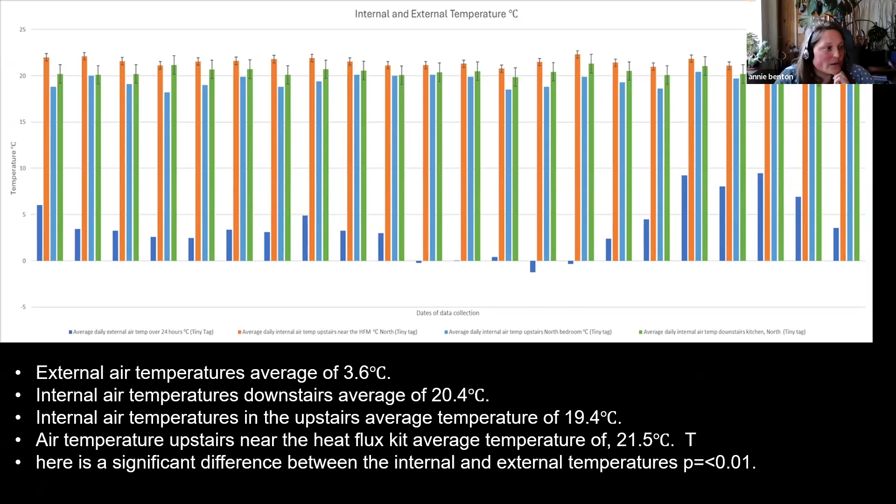So in terms of heating the building, our building in the winter is mainly heated from the sun. It's positioned to face south, and the sun comes in through the windows and hits the back wall and hits the slab on the floor and actually heats the mass.

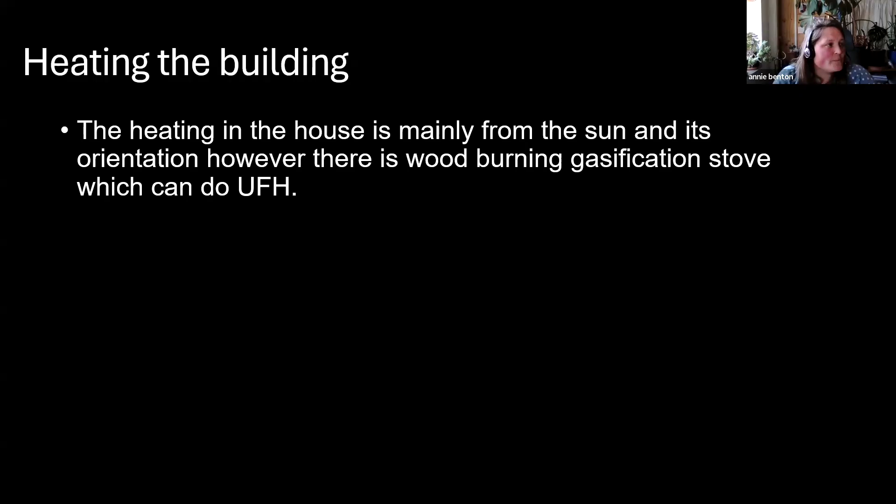We don't light the gasification stove that much, but we do light it. And in this study, when I reported how many times we lit it, it was about 50% of the time. But it's also for hot water - if there isn't the sun, then we need the hot water. So we do have an iBoost on the thermal store upstairs, so we can take electricity from the grid and change it into hot water, power the heat store to heat up. But it's more electricity expensive doing that, so we'd prefer to do it with the fire because we have logs. So we might be lighting it more from that respect.

I think it also highlights the power of internal gains in buildings. If you live in a low energy building or an airtight, insulated building, you'll be really well aware of this. But if you're cooking of an evening and you've got pets and a couple of people there, the building really drastically increases in temperature in those moments where your internal gains are larger. And then because your building is warm and airtight, those internal gains stick around.

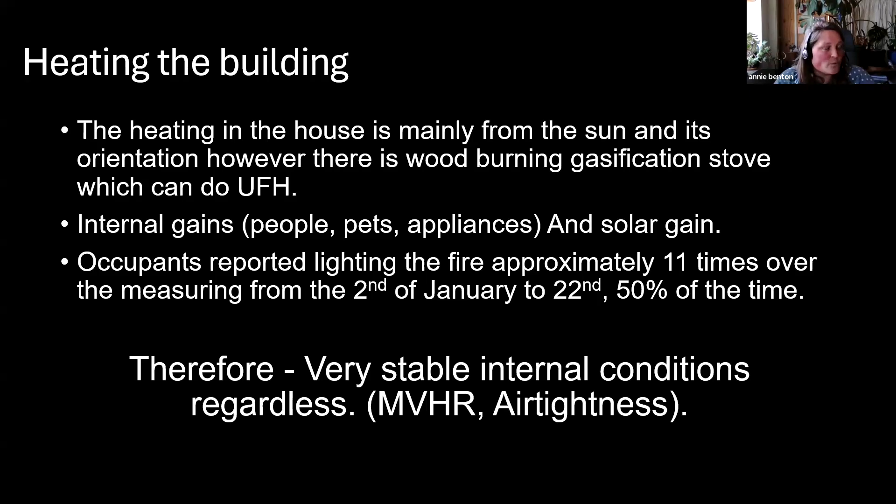So it shouldn't be a way to heat a building - you should always have a backup with an actual heating system. But I think it's a really important question to look at in terms of a way to heat your building. I think there's a discussion to be had, as well as obviously the solar gain, as long as there's sun, of course, which a couple of days there really wasn't. So very stable internal conditions, regardless of how we heat the building. They were all very stable and consistent throughout the whole time.

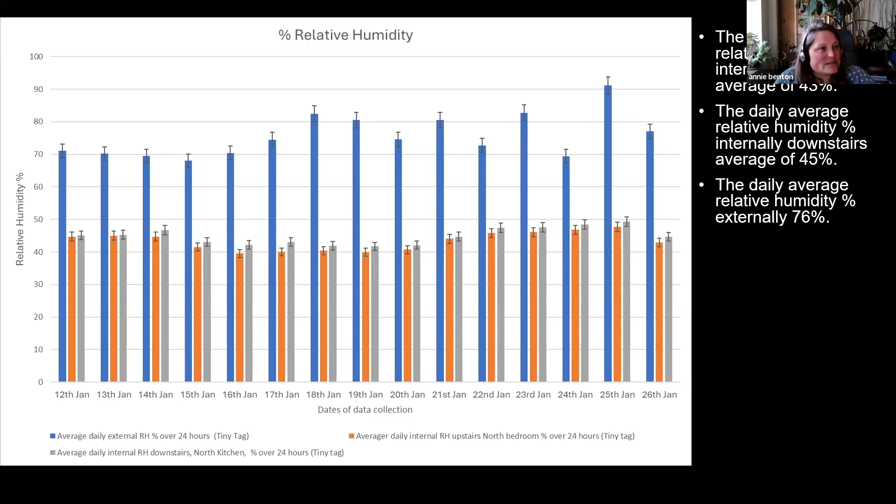Relative humidity, so roughly around 45% on average, outside 70 to 80% - a significant difference between them.

And we would expect this. We've got MVHR going on, which is helping. But I think what's really nice is we've probably seen this picture before, but it shows you the gauge of relative humidity where pathogens like to breed and reproduce.

So you really want your building within the range of 40 to 60% humidity. Some people find 40 a bit low, so around 50% mark. Most buildings in the UK are in the 70s and 80s constantly, even with extracting bathrooms. So I think it's a really underlooked thing in health and indoor air quality. It's also a really good measure to associate with things like carbon dioxide levels and VOCs - if you have high relative humidity, you're probably having high levels of those things too.

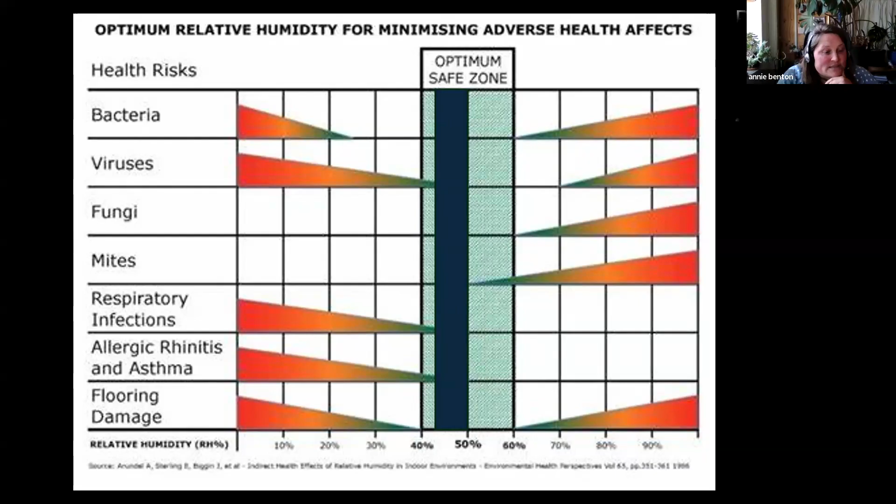So our house is doing really well, we're in this safe zone during the 15 days. We do have MVHR, as I said, and also the materials are hygroscopic. The clay plaster will absorb and release moisture or water vapor when levels are higher and when they're not. It's an incredibly hygroscopic material, and so is the straw, and so is the wood fibre.

I think it would be really interesting to do a study where we turn off the MVHR and measure the moisture levels in the clay, and see what happens over a heating season. I think that would be really interesting. So you get this lovely moisture buffering, which is a brilliant thing that effectively most natural materials, if not all of them, do - they all have hygroscopic qualities.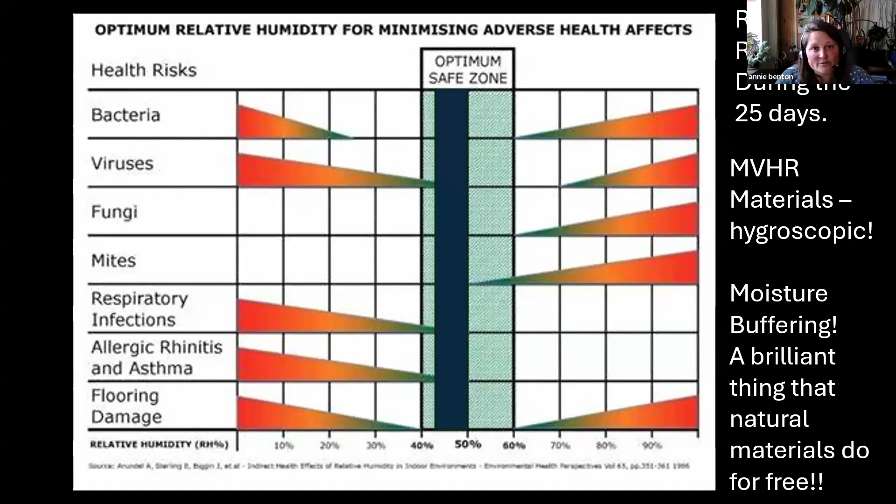Occupant survey - so the last aspect of the BPE is that it really must include occupant surveys. This is because buildings perform relevant to how the occupant lives in them and uses them. So generic data and generic methods don't really work if you don't do a questionnaire to see who opened what window, where did they dry their washing, how many times do they shower a week, and how do they use the space.

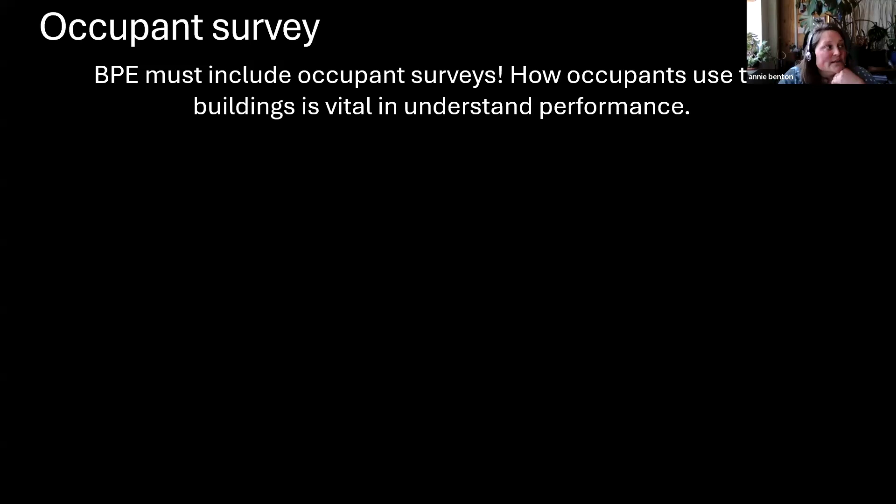So I did a survey, but obviously it's very biased because we live in the house, so we've got a bit of bias in there. Although when we have visitors, they all share similar feelings. Everybody comments on the acoustic properties because it's very acoustically pleasing - that would be the best way to put it. It's not silent, but it's very soft sound.

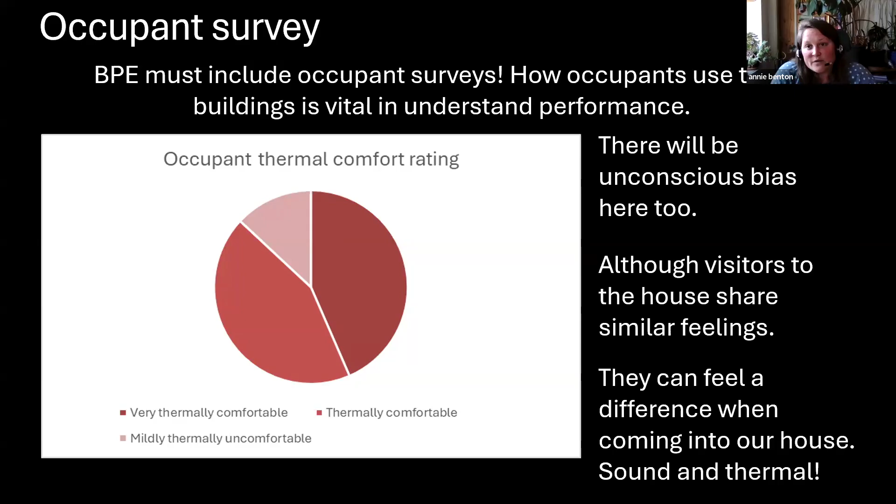Which is lovely, and thermally it's really comfortable. So when people come and stay, they do say it feels a certain way, which I think is actually really common when you go to a lot of bio-based material buildings, whether it's wood fibre in a timber stud, a hempcrete, or straw. You get this general feeling of like a sort of warm hug.

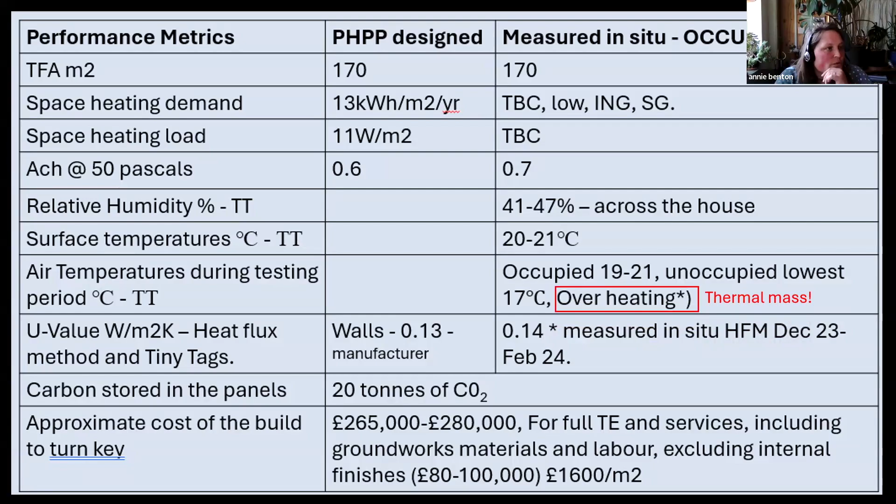So back to this paper I mentioned at the beginning, where I said highly insulated buildings were underperforming. Even if you could look at our data and say, well, it's not performed at 0.13, therefore it's underperforming - yeah, if you were looking at just the U value, I suppose you could say that. Obviously, with the error analysis, it sort of argues back a bit on that point. But I think this is a really valid point we need to address - if we're building buildings that are highly insulated, but made of high embodied carbon and high embodied energy materials, and they're still not performing, what was the point?

When actually we could have been insulating them with something that stores biogenic carbon, using the building as a carbon sink. And yeah, fine, maybe it underperforms slightly, but the benefits - carbon capture, indoor air quality, hygroscopic buffering, all of those things - you get just because it's a natural material. You just get it for free because that's what they do.

So at least if we did it like that, then you'd be getting a better health of a building with the occupant in there with lower embodied carbon and lower embodied energy. But yeah, fine, maybe it isn't 0.13.

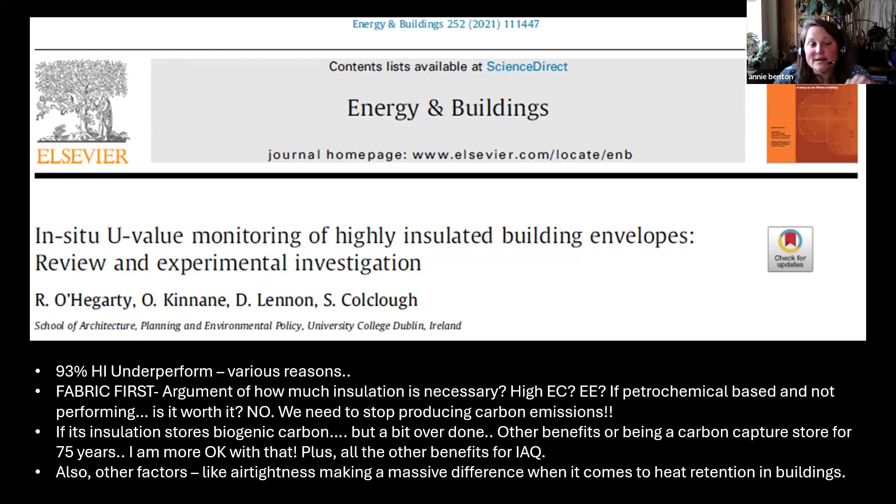I think this is an interesting discussion, but I think also things like airtightness make a massive difference when it comes to retention of heat. I think they're massively overlooked and need to be more at the forefront, which is why I love what Ecological do, because we do CPDs all the time trying to spread awareness of the importance of a warm building. But then obviously you need to look at your ventilation strategies as well.

So the last bit I want to talk about briefly is the carbon, and highlighting the importance of looking at the whole life carbon of a building. We had the Future Homes Standard consultation, and when I read through what the built environment professionals had said, 99% of people were raising embodied carbon as something that should be in a metric somewhere. As we make our buildings more efficient with operational carbon, we need to look at our embodied carbon and look at that balance, and I'm just flagging that.

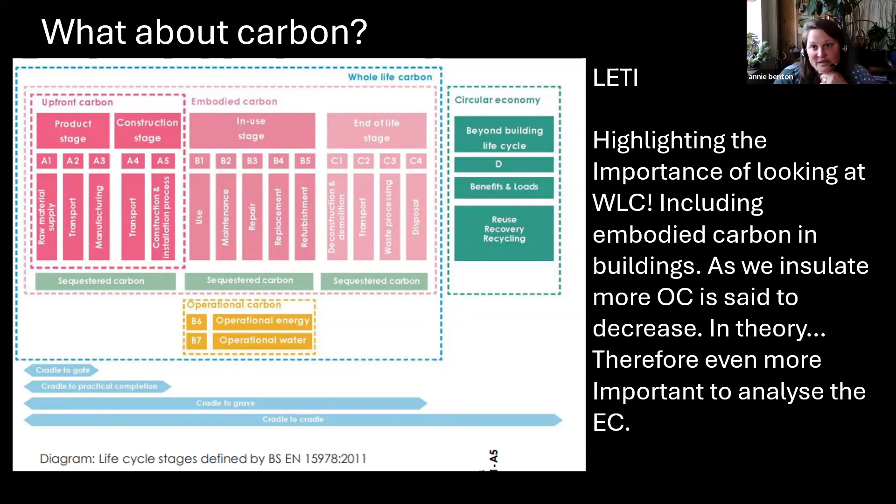But I think, and hopefully that's coming. Obviously bio-based materials with low processing would hopefully be great in that respect.

So John did some calcs for me for Future Build a couple of years ago, and I just think they're really nice to share. He did this graph that shows whole life carbon emissions per 100 metre square of different walls of the same thermal performance. As you can see, masonry has 3.8 times the emissions of the straw and I-joist, and 2.1 times that of Ecococon.

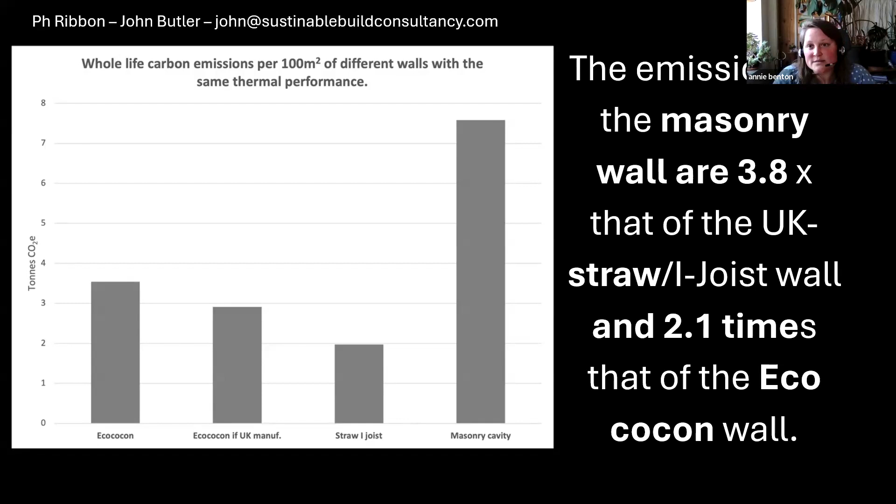But yet we are building all the buildings with masonry, and they're not performing and emitting, which is madness to me. Obviously masonry was never going to win in this category, but we're just putting it in because we're SBUK, and I think it just highlights again another amazing thing about biogenic materials.

They're going to store carbon because they photosynthesize. So obviously the straw is going to store 100% more carbon dioxide than the masonry. The masonry wasn't going to stand a chance there.

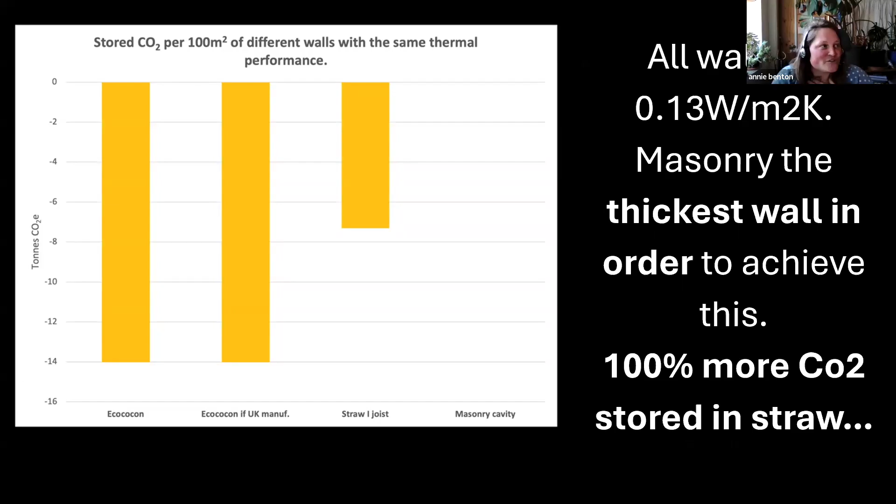So that brings me to the end of my talk with you guys. Throughout doing my dissertation, there was a lot of reflection happening in the wider aspect of the practical construction industry, alongside the actual academic, and the disparity between academia and practical work in trying to drive forward change. I think we can't deny that we're in a climate emergency, and our built environment needs to be better. It needs to do better.

And it isn't that we don't have solutions. We have solutions. We have so many products that should be more mainstream, and they're not. There are still some barriers there, but a lot of the barriers have been addressed. So I think we need to do better.

We know that Passive Haus design is good. It's a good design method. It's rigorous. With the certification, it's even better. But even if it's a low energy version of that, and it's not certified, it's brilliant.

But what I would say is, if we're doing low energy buildings, why are we not then trying to do them with bio-based materials as well, rather than doing them with high embodied carbon and high embodied energy materials? That's not to say that all natural materials have low embodied carbon - some processing doesn't - but I think it's a balance of getting the right material and the low energy design.

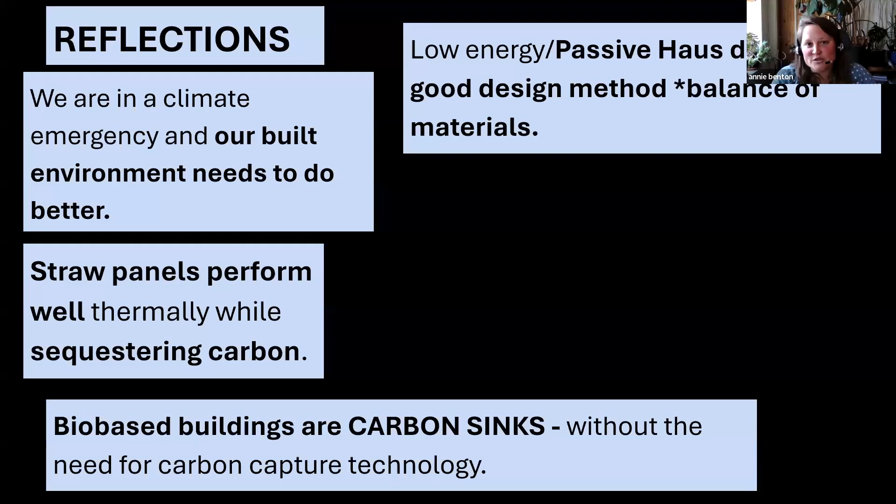I know that straw panels perform well thermally and they sequester carbon. Therefore, can we use bio-based buildings as carbon sinks? Obviously we'd have a huge amount of carbon we'd have to trap in order for it to balance as a proper carbon sink, but if we don't do it, then we've lost that opportunity. So it isn't saying that just building bio-based buildings would solve climate change, but it definitely would be a helpful thing to do.

And I just think the last point is that bio-based materials should be in mainstream construction. They should be in education for mainstream construction. Young people coming up into construction, colleges should have exposure to them. They should know what wood fibre is and how to install it.

They should understand about airtightness. They should understand about biogenic carbon in materials, how to care for bio-based materials. So there's a lot of education that needs to happen - that stuff is starting to happen, which is amazing. But I think there's just no excuse really. Bio-based should be above ground in the places where it can be, and we leave the other stuff that needs to be in the ground for strength and structure to stay in the ground.

That's a picture of my dad in the sun with his beer, because it's a sunny day, and he would love to have talked you through all this today and been part of it. So thank you so much for listening.

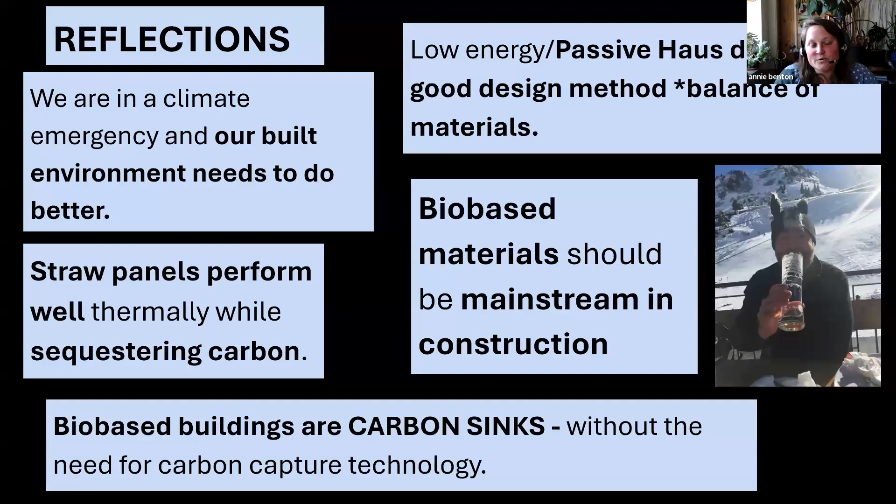Over to you, Cyprian. Thank you, Annie, that was absolutely fantastic, my goodness, a whistle-stop tour. Sorry, it was a lot of information. No, don't apologise. Seriously, I know where you live now, so I'm going to come and move in. Yes, come and join. We're all going to move in. Come and move in. Hands up, who's going to Annie's?

No, Annie, that was absolutely fantastic, thank you very much for that. Thank you. The depth to which you went in breaking all of that down, from the conception to the final outputs and the evaluations, everything was just on point, absolutely on point. And we've had so many questions. It's been a labour of love.

I bet. Yeah, I mean, one of the things I wanted to ask before we get on to any more questions, I'm mindful of time, we've got a few minutes left, was timing. Please don't go back to the slides.

Just if you can recall, you said 2 days to unload, about 2 to 3 days to put up. So the whole structure was delivered and up within a week. And the roof then came 2 weeks later. It was a bit delayed, some part of the roof, like the wood fibre, there was something on another lorry that arrived. So it would have been probably 2 weeks for the whole thing if it hadn't had the week in between, but I think it was 3 weeks in total or something.